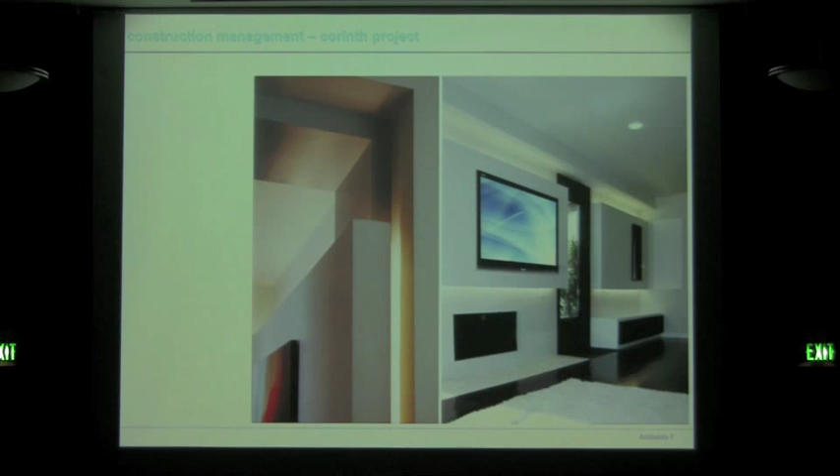Our design arm—this project started at UCLA under Heather Roberge. We designed the whole project ourselves, and we actually built it with a budget of $20,000. So we designed and built this whole space.

The second project is a research project that we did with Neil Denari, essentially research based on looking into different patterns in which cities are developing in the U.S. especially, and then we came out with a couple of ideas on how to hopefully proceed in the future. Obviously, they're pretty crazy.

The next project is a pre-manufactured home that we're developing for Malibu. The panels of the home are actually being made in downtown LA as we speak, and we are going to build the whole project in about 3 months. We developed and planned the module so it's basically shifted in plan, so you can have different views of a lake in front of this property.

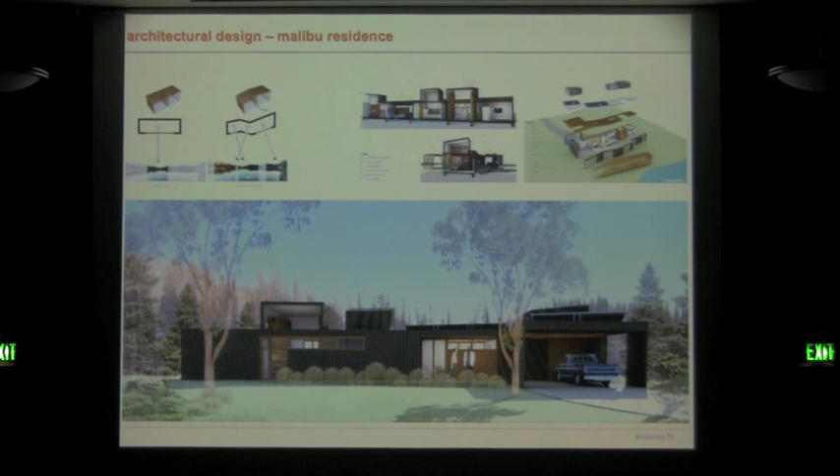Second house is a house for an artist. Essentially what we did is the artist lives in this metal box, and then we lifted the box to create interstitial space underneath it, and that became her studio. So she lives in the box and works underneath the box.

Next project is basically an addition to a community of different bungalows, and we were asked to add a second floor to them. The first floor essentially follows the grid on the left, and the added floor follows the grid on the right, and they converge on our site, creating a deformation in the new housing and the new housing types.

Next project is an office in Culver City. It's organized with a spine that goes through the middle of the space, and the different components are organized along that spine. As you can see on the right, you have the desk on the right hand side of the space.

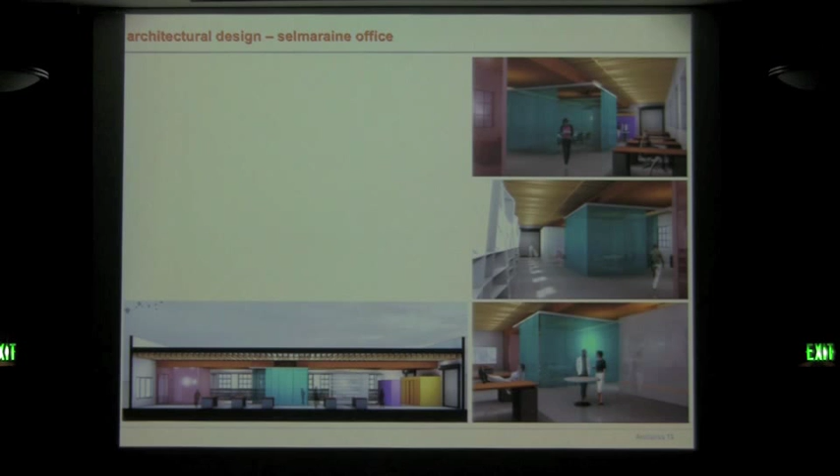This project is a proposal. We try to reconfigure the way housing typology works. Instead of having 4 different towers, we try to mix the programmatic elements across different towers so that you actually create different views and hopefully interactions between the people that live in these different towers. So as opposed to having 1 tower for 1 house, we commingle the spaces.

This property recently finished. We basically did the construction management and the design. We essentially redeveloped the entire facade.

We try to emphasize the geometric conditions that the house has on the bottom left-hand side. This project is under construction, and should hopefully be finished in 2 months.

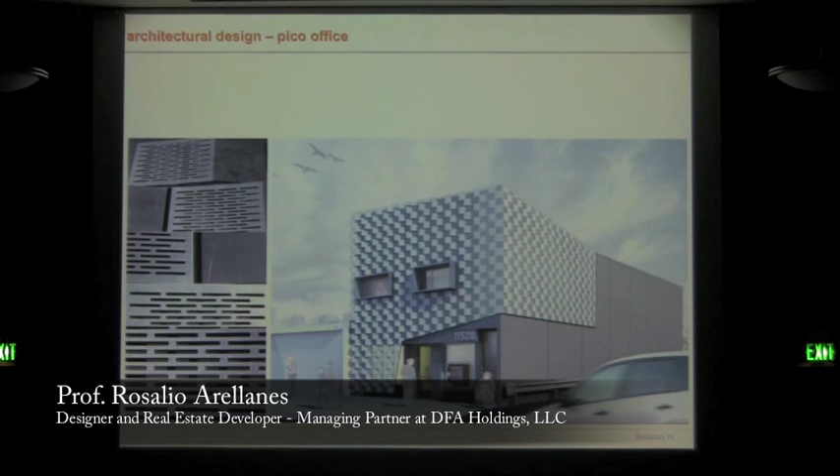As you move across the facade, the panel itself thickens due to the introduction of this fold in the panel. If you look at it from one side, it reads as solid because of the solid side of the panel. From the opposite side, it looks more open because of the openings in the panel. So it creates difference. This house was the first house that we actually developed, designed, and constructed ourselves.

We try to use material reality to introduce continuation of the different spaces inside the home, and we also try to use sectional conditions on the spaces so we can create flowing spaces inside the home.

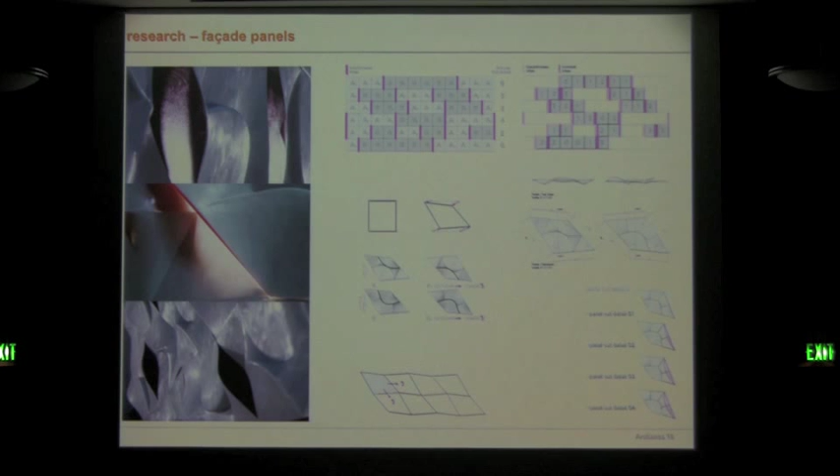This project is a research project where we developed a panel system that you can tessellate in different ways to create difference throughout a facade. We also introduced this opening technique here on the right, where you can cut that piece out on site to create fenestration as you move across the facade. So it's about creating difference in one panel.

This project is a research project where we started with plan formations and tried to develop and copy different ways of making connections in the real world, basically overlaying different types of materials.

And that's it. Thank you so much for your time.

Should I go ahead? All right, good. So my name is Carlo Aiello.

I teach a second year studio here, and there are four main things that I'm interested in. The first one is obviously teaching. But just an introduction first: I graduated from Columbia University, lived in New York for 10 years, and have been in LA since 2 years ago.

I'm interested in publishing, industrial design, and obviously architecture. I'm the editor-in-chief of a New York-based architecture and design magazine called Evolo, which was founded in 2009 with the intention of promoting innovative and vanguard architecture. This is the issue coming out now in November, called Architecture Neogenealogy.

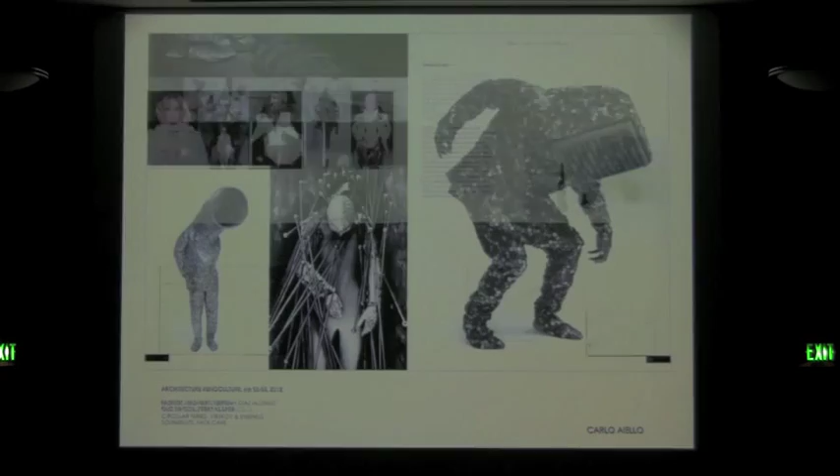Another project we're developing, publishing also in November, is a 2-volume book that's a compilation of 300 projects from a well-known competition we organize called the Evolo Skyscraper Competition. The idea behind this book is to have 6 different chapters combining the different ideas we received in the entries: technological advances, ecological urbanism, new frontiers, social solutions, morphotectonic aesthetics, and urban theories and strategies.

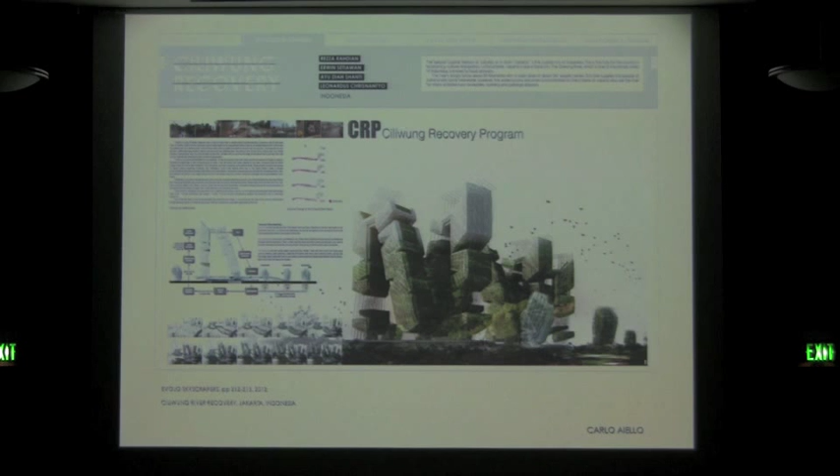For example, this project is about the revitalization of a river in Indonesia that uses different kinds of filtering systems to allow for filtering the pollution of the river, but at the same time providing open markets, etc.

Another project of interest in this book is about fragmentation and pixelation, in this case the studies of Stephen Wolfram on cellular automata and fractals, and how we can use that kind of tessellation in architecture. Everything we design, we do it all ourselves.

We have our graphic design team, which is us working at the office here in LA and in New York. This poster is also about the skyscraper competition, in which we have 620 projects in this little publication we just published a couple of weeks ago.

As I said at the beginning, this is the part that interests me about publishing creative work, mainly from young professionals and students. The second area I'm interested in is furniture design.

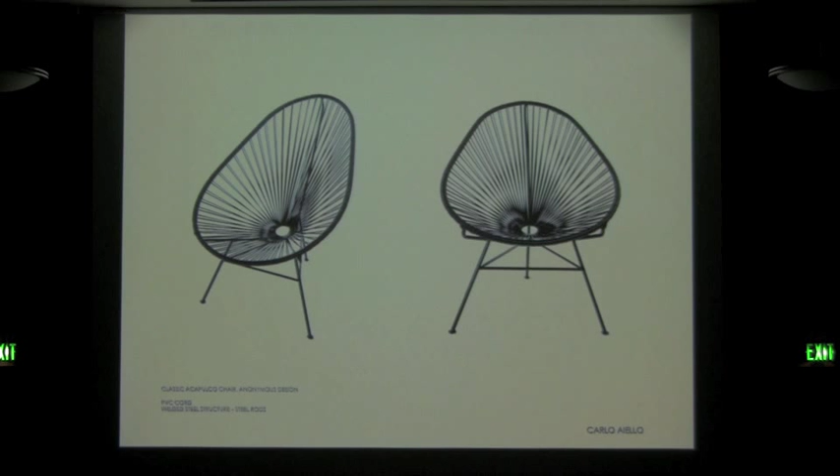In this case, this is the well-known Acapulco chair, an anonymous design from Mexico. We got a client who was looking to redesign this chair using the same materials.

So our idea was to create something we call the parabola chair, which uses steel rods and recycled PVC cord to create the structure. We want to create a continuous surface that serves as the backrest, the seating, and the overall structure for the frame.

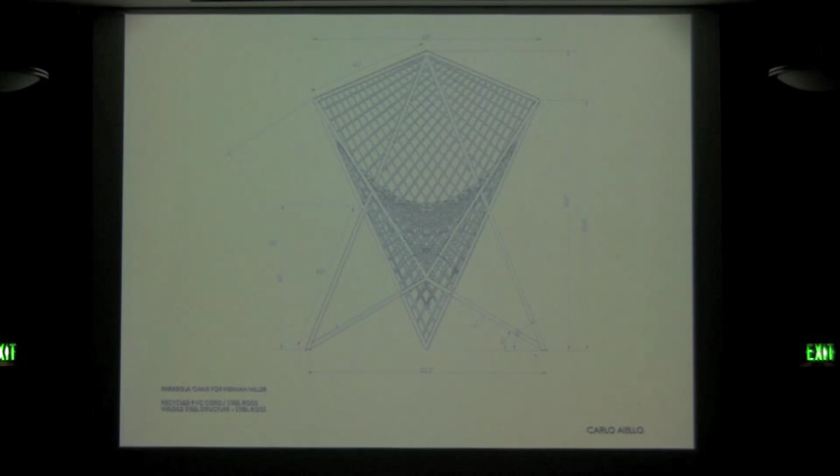Right now we are working on different prototypes for this, and hopefully it will be available in stores in 2013. Our main concern is how to create this continuous surface without it being a huge chair, depending on body size, and how to have the most comfort within a very constrained space.

We didn't want to create a huge piece of furniture that cannot be located anywhere. So we were thinking about different ways to create the weaving. One way would be to use the recycled PVC cord, other techniques would use steel rods of a smaller caliber, and there are some details on how everything would be attached or constructed.

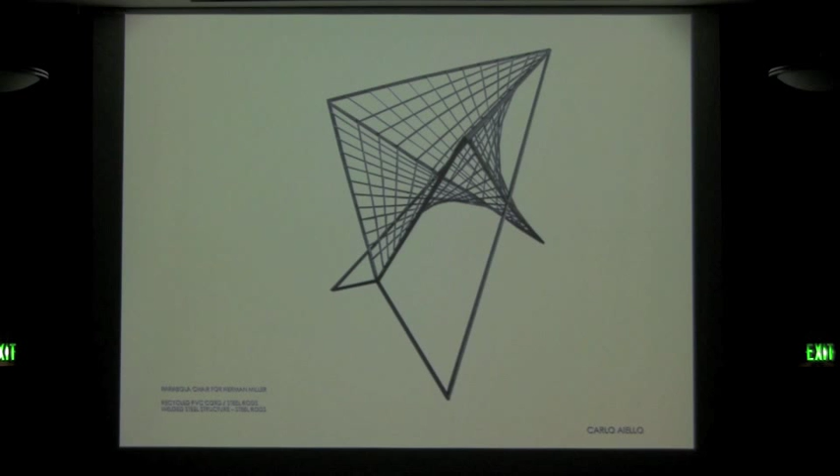The third project I'm presenting now has been in development. We'll just go ahead and advance. It's for an open market in Veracruz, Mexico.

The idea again is a self-supporting structure, similar to the chair. For this one, we are investigating traditional basket weaving and how we can create a self-supporting structure for a small open market.

The idea was to create three main domes that would allow for different programs inside, with different spatial qualities—from a super high space to smaller areas—and some backup program underneath, which isn't shown in this section.

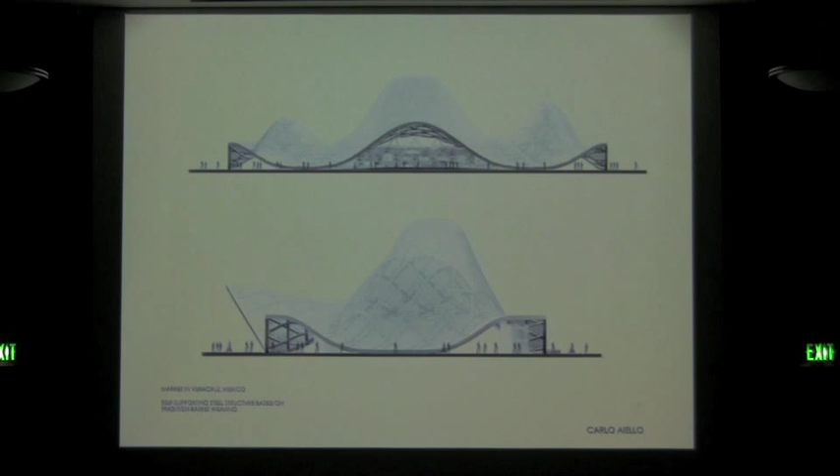So pretty much that's what I'm showing to you tonight. I'm interested in teaching architecture and industrial design. Thank you.

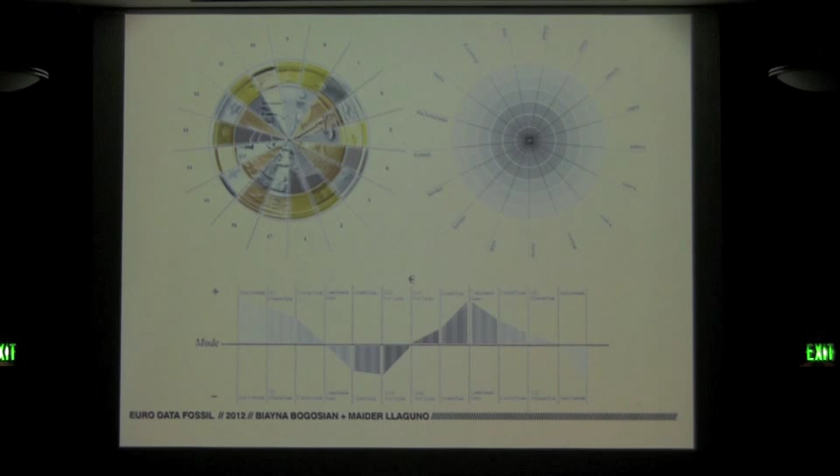Specificity of the territories and its users. It seeks a constantly added resolution of information that is contained within a project.

It allows us to question how to materialize the cache of a set of localized information, how to curate it in a sense that allows for the user's input and relates to further social constituencies. Buildings could start to operate within open source localized constructs where the users inform more sustainable, highly diversified, and technologically advanced buildings.

Objects designed for communication contain information that goes well beyond their immediate use and appearance. In some cases, objects like cell phones and computers exist to provide us access to complex systems and networks, behaving as gateways and interpreters.

Whether openly and actively, or in a subtle and subliminal way, these objects become a crucial part of our understanding of the physical environment. As communication prostheses, these devices are capable of accelerating or interrupting the rate of our daily behavioral patterns. As designers, our goal should be to help develop and improve these dialogues.

For instance, we can start to trace and analyze various users' range of movement and utilize the vector of difference each time in geometry construction. An example of that would be designing earthquake shelters in which the material behavior of the output responds to the initial rate of displacement.

Or we could allow multiple users to directly influence the geometry output. In this case, the designer needs to establish two types of variables: the first being the initial construction method, as well as the degree of influence of each user. This information is hard-coded and creates the framework of the project.

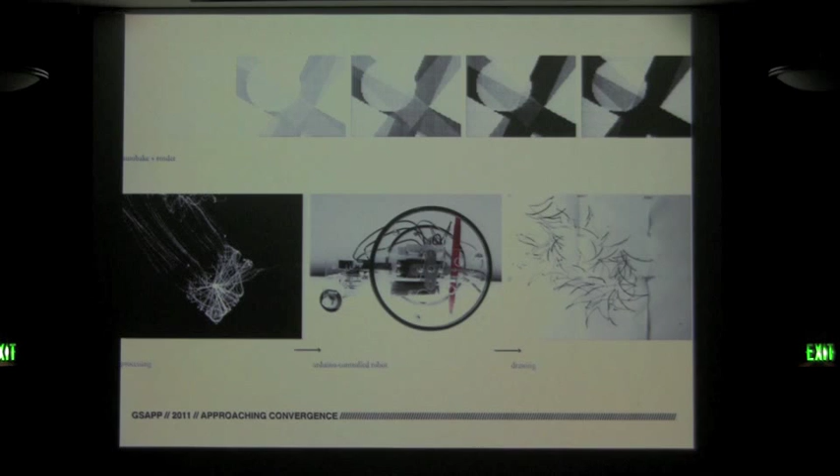The history of modernism is that of a progressive distortion of place, of the emancipation of architecture from the circumstances of its immediate physical surroundings, resulting in systematic production techniques. Based on this, our built environment dimensions were cataloged in charts based on efficiency and generic conditions of use. And a material such as wood was not differentiated based on its anatomy, but based on its standardized external dimensions, resulting in homogeneous construction typologies throughout the world.

However, now with information technology enabling us to map local and global environmental data, coupled with advancements in digital simulation techniques and robotic fabrication technologies, we can revolutionize customization of our environment. The potential of shared resources, software, information, and techniques, when materialized, is to transcend the scale of individual and independent product modules to a larger scale of manufacturing and distribution processes. In this design methodology, where the design and typologies are each time subjected to different user and environmental inputs, new possibilities for a more interactive relationship with our product and environment emerge.

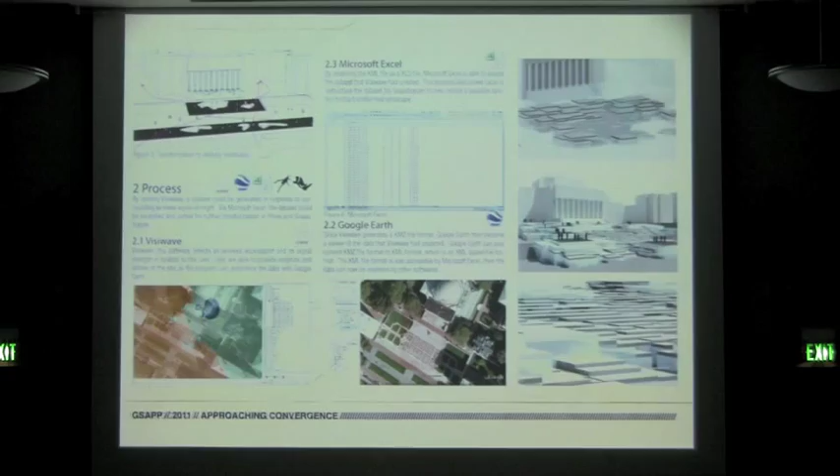Incorporation of geomapping and social network technology in everyday modes of communication allows collection of data not only from the place itself, but also from the interaction with the user. Applications designed based on information sharing, user collaboration, and interoperability that heighten the significance of users' input in an open source, communal, participatory system enhance interactivity with the physical place. In this regard, social networks such as Facebook and Twitter, set up based on a logic of data filtering and sharing, redefine today's social, political, and economic place of connectivity, posing the question of how to frame an architecture practice that facilitates participatory information sharing and collaboration where user and environmental inputs can be integrated.

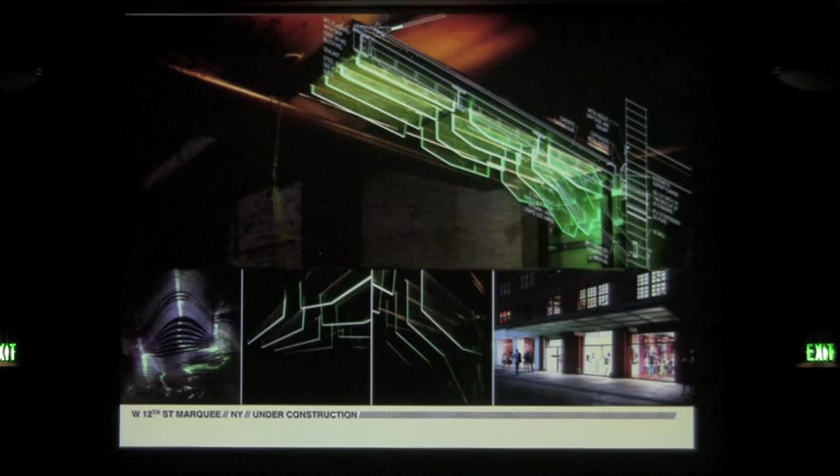If architecture's goal is to reference its environment and to be referenced by its environment, then as designers of these scenarios, we have to develop and improve this dialogue. The architect, as mediator between material and immaterial, human and technology, has always operated across a multitude of domains at once, with an array of strategies at hand. The digital age has only accelerated this multiplicity. Each novel tool introduced to the architect's toolbar has struck a new vector of architectural narration, and with it opened further possibilities of conveyance of concept and method.

The goal is to approach a convergence of varied user inputs possible with communication devices, with computational platforms of design, with a specific focus on integrating techniques of digital and human craft and analysis into a near seamless and active coexistence.

Thank you very much.

Okay, so just by way of introduction, my name is Laurel Broughton. I'm currently teaching second year, and this is Brendan Muha, who is also currently teaching second year. This is the beginning of a project we're working on. It's inspired by some issues we've come across in our work teaching second year. It's part of an ongoing conversation between the two of us about the everyday life of architecture relative to the discipline of architecture. Second year is an important point in the architecture program that sits between the foundation year and the more pragmatic elements of the comprehensive building project.

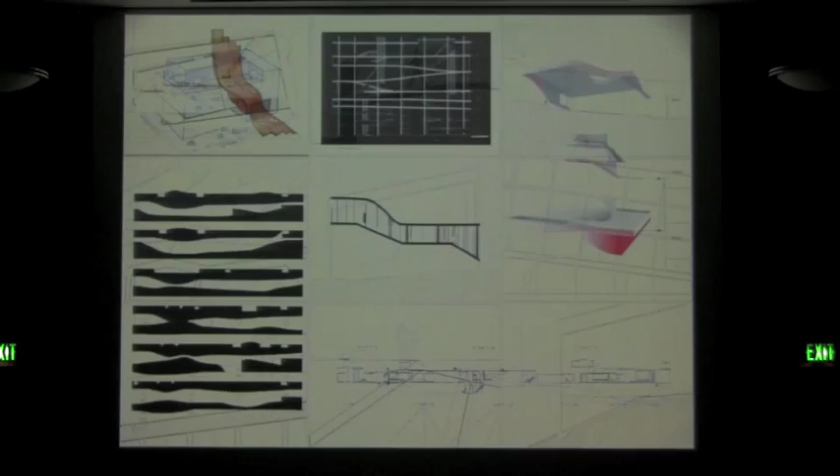It's also an ideal time to investigate larger disciplinary issues in architecture. So what we just saw were some student images of sloped floors. We noticed this feature again and again, and we realized we're all tapping into a kind of latent architectural desire that recurs throughout the discipline: smoothness, continuity, connectivity, flow.

And so what happens is this desire always works its way into steps. It's discontinuous, choppy, and clumsy — discrete bits of material, not continuity. But they're doing the best they can with what they have, in that we have a reality that doesn't actually work with slopes very well, and they become mostly visual.

And they become vacant and uninhabitable, which is exactly what we have here. The idea, the image of connectivity — a lot of wasted material, but not actually real physical connectivity of people relative to one another. So you're damned if you do and damned if you don't. But architectural history is full of examples where we've failed to occupy the spaces we can envision. Here are two familiar examples that never got off the page: Superstudio and Banham and Dallegret.

But here we have Mies and the Smithsons. They understood that new types of space required new tools for living, and they committed to making them. So you can see how the lightness and the volume of Mies's furniture and dividers allowed for the uninterrupted flow of the plane of his open plans.

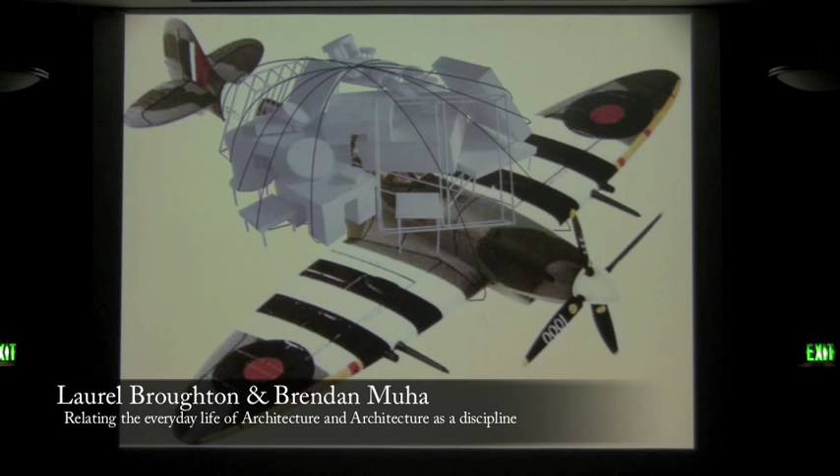And now the fairy tale. So they set off for a new land, bringing with them all their possessions and furniture, some old tables and 20 cents in their pockets. After a long journey, they came across a habitable place, and 2 by 2, they began to unload onto this broad new plain. Off of the old plane and onto the new plane.

They ventured forth, but something wasn't quite right. There were problems. This broad new plane was at a 10% slope. Nothing worked as planned. Some things just rolled away. Even the children were upset.

They had no place to sit or read or play. Life was all work. And even Andrea Branzi was upset and couldn't figure out what to do. He tried to sit down and think about it, and then all of a sudden he lost his balance, and he and the stool tumbled down the slope.

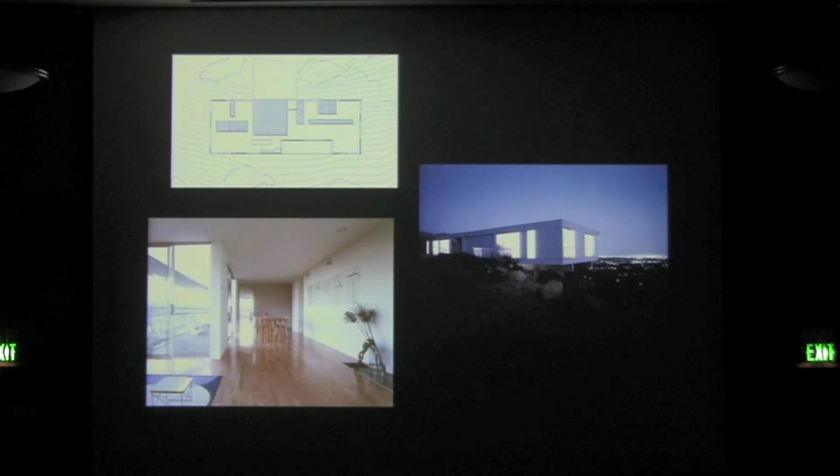On the front side, you have what you see on the bottom left, a 184-foot-long view through the house, through the living, dining, kitchen, family room, and the smaller rooms are facing the hill.

There's a second house that I want to show, the Sola House, Mount Washington. 3 volumes stacked on top of each other, all of a different size. They sit sort of lightly on these concrete walls that we excavated into the hill. It was a very difficult uphill site.

So the foundation walls are both the border between man-made and nature, as well as the foundation. The plan, bottom left, entry. Middle is the middle level bedrooms, and you see on the top right, this canyon going through the middle level, and the library down here.

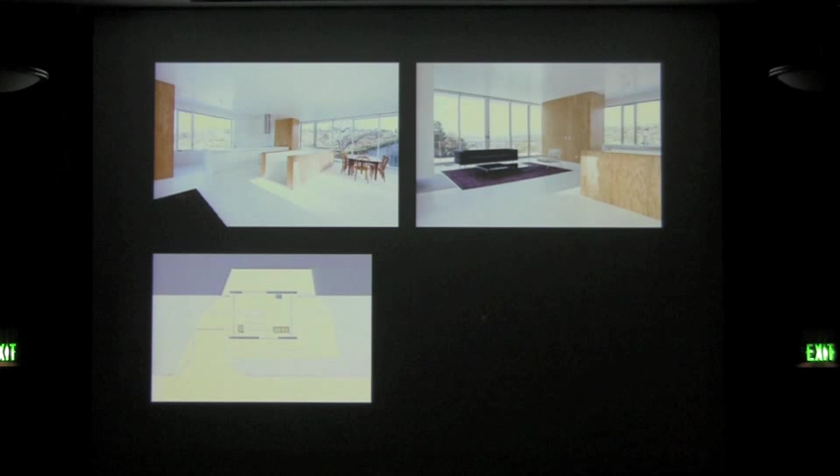The whole idea of these elements are these sort of tubes, white walls, floors, ceilings, and these elements that are sheathed in plywood that contain bathrooms or storage and so on. So this is at the top level, the living space, open on one side to a park, the other side opening to the city.

Some of the art-related projects that we did: this is a project we did with Olafur Eliasson. He's probably best known for the weather project he did at the Tate, top left. And so the house that I showed you at the beginning, the Jamie house, this is what he proposed to do to it. A 120-foot diameter sun attached to the side of it.

Now, we start working with the structural engineer on that. The city freaked out, pulled the plug. That was the end of that. He then introverted the project, did it all on the inside.

Sharon Lockhart, an artist we've been working with for about 13 years, project in Vienna at the top left, project bottom right, something that was at LACMA this summer. It's opening in Vienna shortly.

Mike Kelley, an artist we did 3 projects with, including the Münster Petting Zoo. This is 2007 in Münster. Every 7 or 10 years, it's an international sculpture exhibition. So we worked on space planning with him on this.

This is a project we did with Stephen Prina at the Secession in Vienna. Basically, we rebuilt about 20 or 30 pieces of furniture from 2 Schindler houses that no longer exist. Then he painted them in this pink, and they were installed in the Secession, and this had to do with a story he tells about an experience in the 80s seeing these Schindler buildings and Schindler furniture.

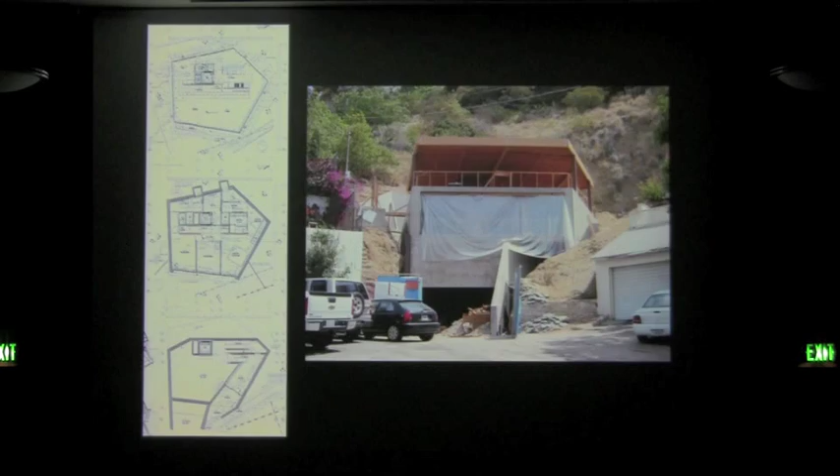Because of this geometry of the site, the only thing that worked there was a 5-cornered house that addresses the topography, setbacks, and so on. Once you get to the top, you have a living room that is enclosed in glass on 5 sides. The roof is supported on 5 steel columns. From this living room, you have access to a level area that you don't have otherwise.

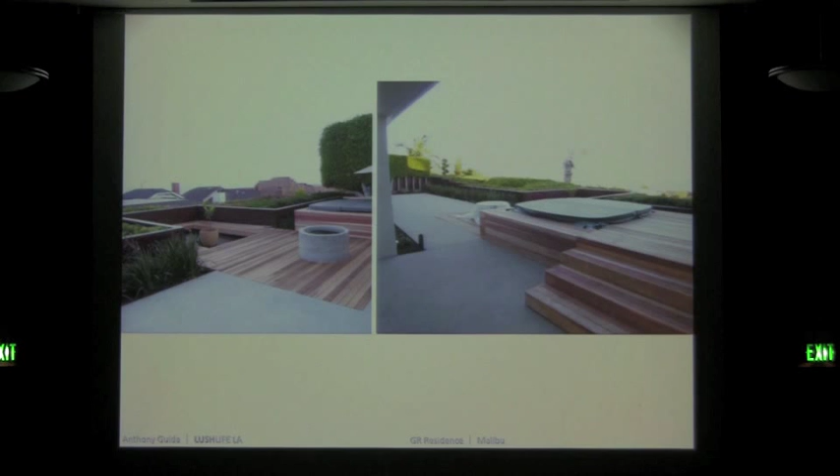Here we did new concrete, raised the backyard about 12 inches to give a better view or overlook. We took an existing deck and made a conversation pit, fire pit, raised spa deck that conceals an inexpensive fiberglass tub. This is a fast-track project for a long-term client. We came in this summer, and the goal was to do in about 8 weeks a redo of their master suite and this really awkward area on the left, a kind of den and office area that had very low ceilings, which we'll get into in a minute.

We fast-tracked this from design drawings to engineering to permits to somebody doing demo in a week and a half. This is the master suite on the right. We updated and got rid of 1980s luxury like the bidet and the fireplace in the bedroom.

On the left, two bedrooms with a new bathroom in between. The trick here was raising the roof, or the ceiling, which was at 6'9", to a standard 8 feet, and getting it all back together per current seismic code without disturbing the exterior, which was renovated just a few years ago.

So you can see the kind of open roof. These are photos finishing up the job, the master suite and master bath on the left, the custom casework in the office den on the right, and that awkward phase where the owners are in but the contractor is not out yet. So we do a lot of that.

So this is the next project, unusual for us because it's not a house. This is the old red car charging station that's on Sunset and Silver Lake. This is currently the offices of independent record label Epitaph.

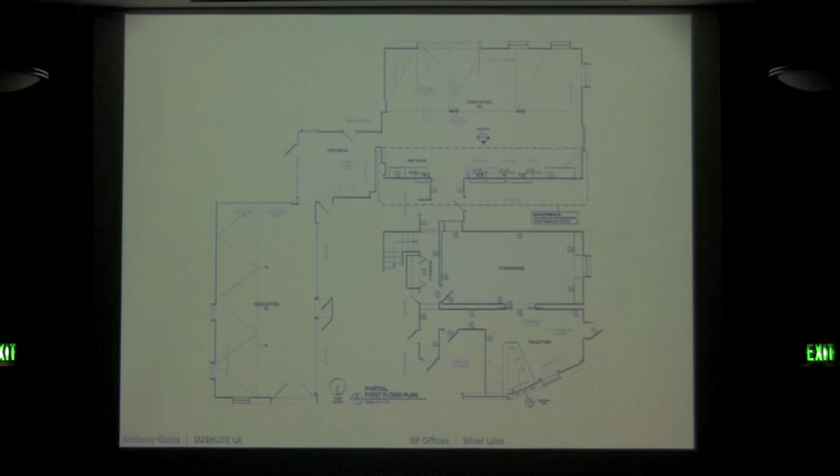We're doing a kind of quick redo for them, a lot of casework, getting a consistent look throughout the offices, new furniture, redo of their conference room, redo of all their public areas, lounges, the entry. So this is some casework in the office area.

Some reception desk, which was a challenge given the contractor. We'll see this in a bit.

This was exciting for us because many of our projects are collaborations with the owner, but in this particular case, the record label has an art department, which is really fun to work with. There's a kind of history to the company. It's very punk rock.

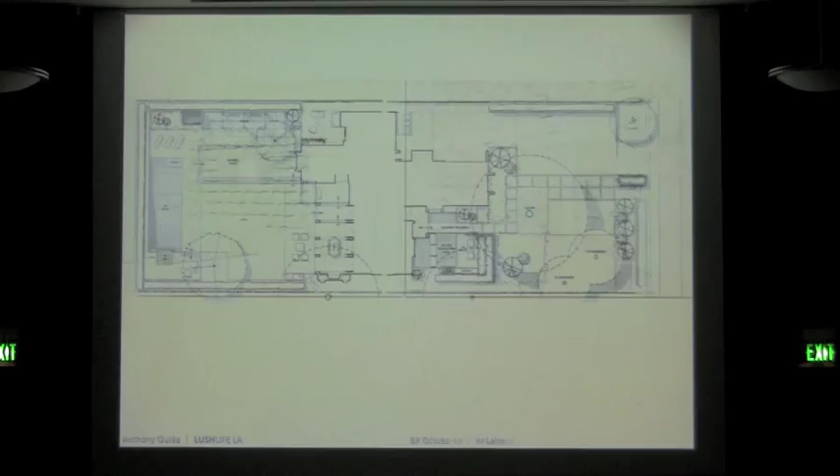Some of the new casework is in. This is an exciting project that we're working on right now. This is an early 1980s Buff and Hensman house in Pasadena that's undergone a full renovation.

Tom Marble, who's an architect, is doing the renovation. We're working with him on the landscape. It was a spec house that never really had a designed landscape, so the challenge was to design something that fit the house, fit the renovation, and maybe the sensibility of a Buff and Hensman residence. This is the entry court, which is a bridge over a reflecting pond, and a water feature.

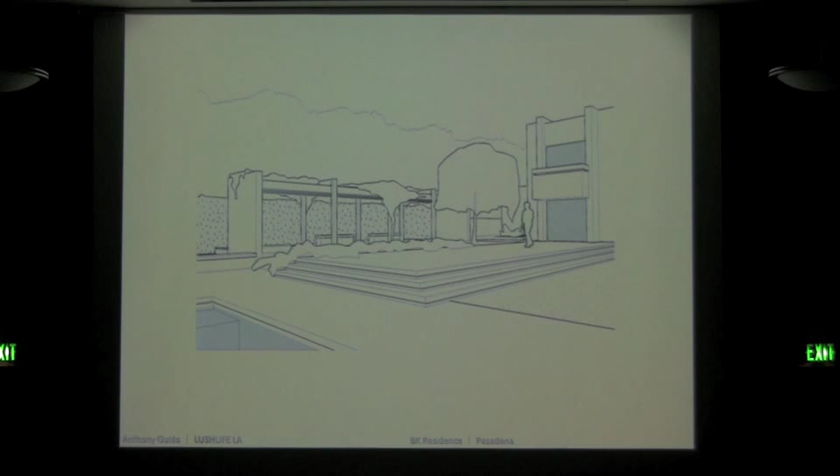And then in the backyard, we're taking cues from a lot of Buff and Hensman projects we've looked at, where we have a kind of paved land bridge that spans the yard. There's a pool in the foreground. There's a pergola structure that's new, that we designed. And this is hopefully getting built soon.

Maybe it'll be built, maybe not. But that's just a kind of window into what we're working on at the moment. Thank you.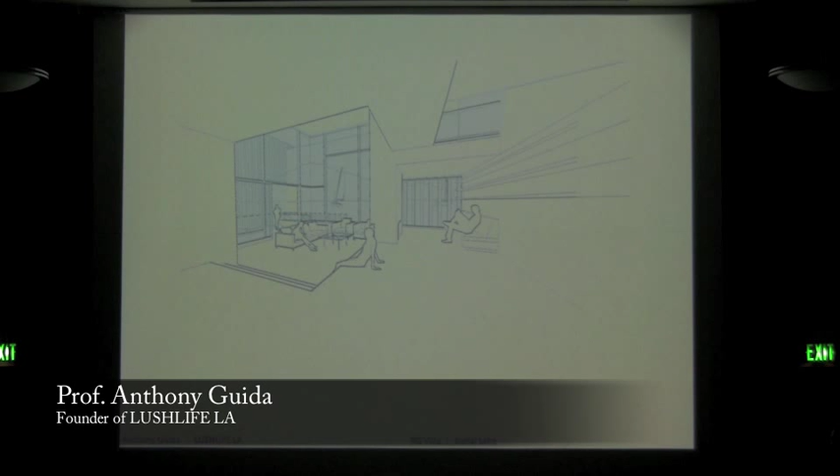We're going to go right through. So my name is Eric Haas. A lot of you probably know me. I coordinate currently the second-year graduate comprehensive studios. I'm going to show you a few projects that have been recently and currently and future in the office based on our kind of educational institutional work that we've been able to do recently.

First project is a preschool for St. James Episcopal Church. This is in Koreatown, an infill site. The clients came to us with the existing parking lot and said we need a building.

This is in January, we needed a building for the opening of school, so we designed a modular building, working with a company that has worked with several other well-known architects. This is a quick design, very low budget project, a preschool for 60 children, about 4,500 square feet, working with a kind of standardized modular system with some custom site work.

It's an infill of the large apartment building on one side of the lot and a mini mall on the other side. This was sort of our first modular building, actually a very interesting experience. This is the building already built in the warehouse out in Fontana, waiting for the site work to be done.

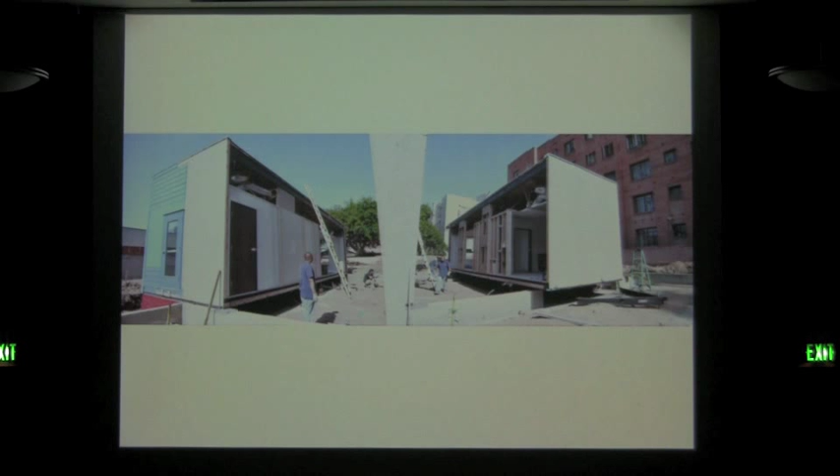Everything here working as a kind of commercial coach was interesting to us in terms of the permitting and the way the whole system was working. So we were waiting for the things to come together. This is the finished building from the front.

We're still doing little bits and pieces here. The project had to open and go through a licensing program, so a lot of very quick decisions were made, some of them not involving us as the architects. So we're going to work on fixing some things.

This is the finished building's interior. There's a nice relationship between the interior space and the exterior you see on the left, and then the kind of hero moments in the side yard, with sunshades in colors that had to be immediately available, so not our first choices.

The second project is one we're doing for Para Los Niños, a development downtown. They do community outreach and education services. Michael Maltzan's building at the Inner-City Arts is at the bottom of the slide.

We're on a tougher street than his project, basically a block off Skid Row. This is what the project used to look like. It's for the teen center, and I defy anybody to think of a color that is not in this image right here. The new project is a change of use to a community wellness center.

They're doing mental health outreach programs for the homeless, including a special dedication to working with families and homeless families. So it's basically an existing brick shell. We're doing a new entry and a whole new interior for them.

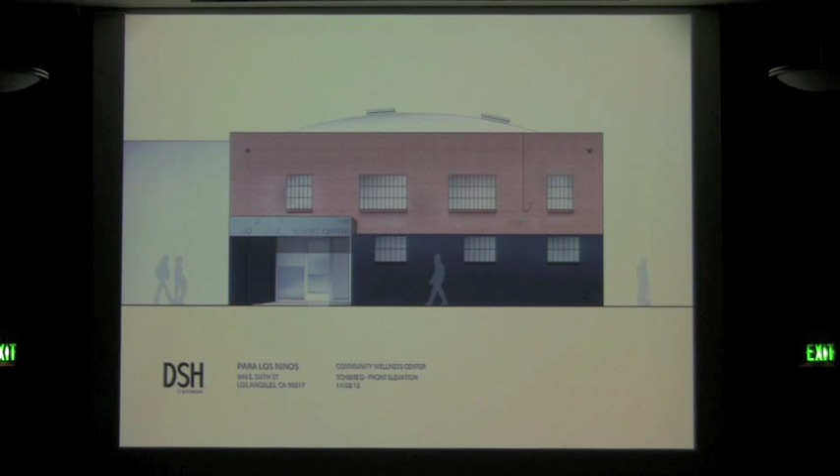So it's a very gritty location. Security is a giant issue, but we're trying to get an interior situation that, once you're past a multi-layered entry sequence, produces a very soothing environment. There are play spaces within this for the kids while their parents are talking to therapists and so forth.

This project is in bidding right now. Then the last project, which we're just beginning, is for Larchmont Charter High School. This is Lafayette Park. The circle is a 1955 to '57 Welton Becket office building that we're doing a change of occupancy and alterations for, to turn it into a high school, leveraging the public facilities across the street in the park, library, and Stephen Cantor's center.

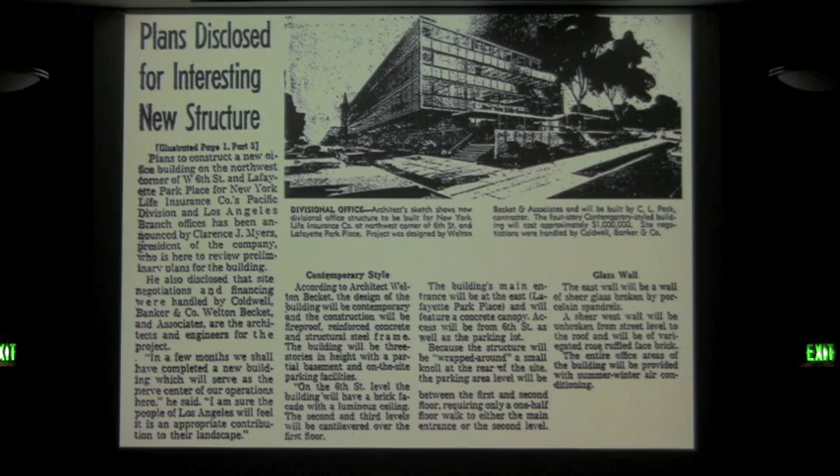This is an original article on Welton Becket's building, from back when the LA Times published articles on interesting new structures. Thanks to Trudy for helping me find this one. So we're kind of caretakers for the building as it comes up.

Right now it's a kind of adult school occupying the building. That's the CNA building, by the way, next to it, now the Superior Court—my favorite building in Los Angeles, for those of you who care.

So this is an interesting building. I mean, it's really nice—each elevation is a different facade. It's all the things that we talk about in sustainability that Welton Becket was doing back 50, 60 years ago. South elevation, louver systems, some ficus trees, which if I have my way will be long gone.

And we'll get into the plans a little bit. It's a high school for grades 9 through 12, about 500 students. This is the plan of a really quirky building, small footprint, 2 exit stairs.

Our big design move was to move the corridor to the bottom of the building across the south facade to serve as a gallery and a kind of social space, thinking that a lot of the activities that happen in a school are outside of the classroom per se. This is the kind of core of the building, which serves as the ventilating heart of the existing building.

And we're going to take advantage of it. We've been talking to the engineers at Arup and trying to convert some of the antiquated building systems into something that's going to work for us in terms of the new life of the building.

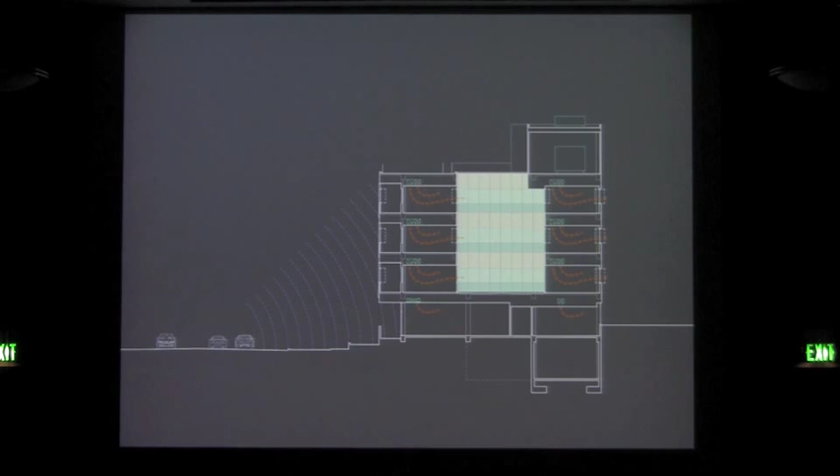The section indicates that we're using this gallery space on the left-hand side as a buffer from the acoustic noise of 6th Street, turning an ancient dual-duct HVAC system into one where one duct will be serving as assisted ventilation for the passive ventilation in the building and air conditioning.

And just an image from the rooftop, suggesting the possibilities for the school. We're really excited to begin the project, a sweep from downtown on the left all the way back around through 6th Street, so it provides a heart, and we're hoping that next year's PechaKucha will show the school as an interesting finished project. So thanks.

Hi everyone, my name is Alvin Huang. I teach in the post-professional masters here, as well as 5th year topic or thesis studios. Just started at USC this past year, or this is my 2nd year now that I'm here, although I did do my undergraduate here. So I first entered USC in 1993.

And at the time, there was a distinction of people that were identifying certain offices as what they called CAD offices. So there was an era where I thought maybe I should learn the computer. And with that, I jumped into it head first and started recently an office called Synthesis Design and Architecture. We're a small practice. We believe in what we call applied research and experimental practice. These are a few tenets that kind of describe the work that we're interested in.

We're going to show a few projects today that kind of ascend in scale. The first is a very small interior installation, which we did in London. Which you see above is the kind of generative diagrams, pixelized version of the structural system, and all of the sheets laid out onto plywood panels.

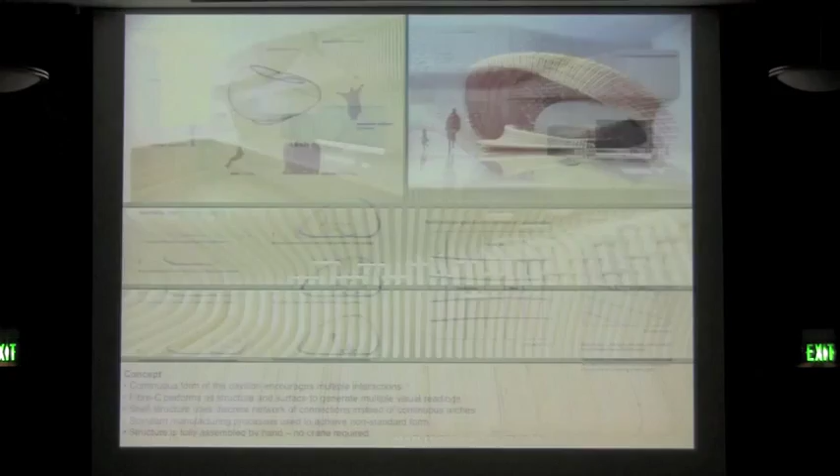This is a pavilion which we did in 2008. It was widely published and has won numerous awards. It's a result of a competition sponsored by Fibre-C, which is a manufacturer of fiber reinforced concrete.

What you see here is the documents which we won the competition with. We went through a series of extensive research and material exploration where we did multiple structural analyses, which helped us design this kind of parametric sizing of the members, and developed a construction document set.

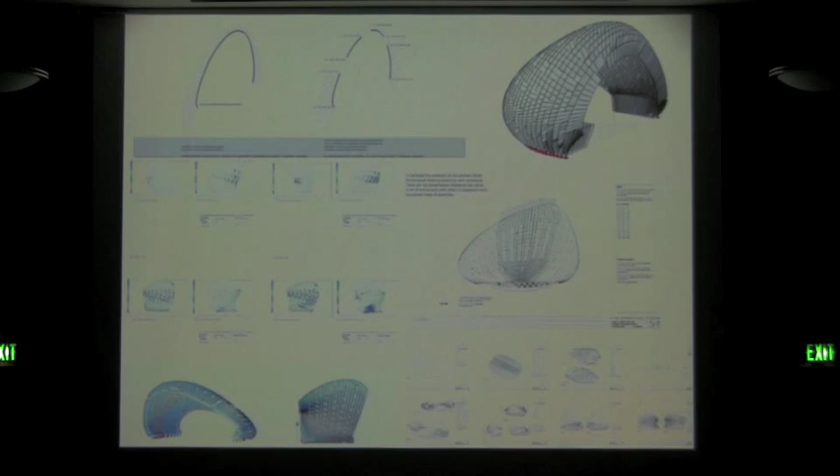Which you see here, which is more like an IKEA flat pack assembly process than a traditional drawing set. See the construction assembly on the top left there, which was entirely a digital fabrication process going from file to factory, and some completed images of the pavilion here.

The pavilion was intended to be on site for 3 months. It was so popular that they extended it for just under 1 year. It has since been sold at auction by Phillips de Pury to an art collector in Singapore, who I have no clue if he was ever able to put it back together. Since there are no photographs, I assume he has not.

This is an installation we did this summer with some students who may or may not be in here.

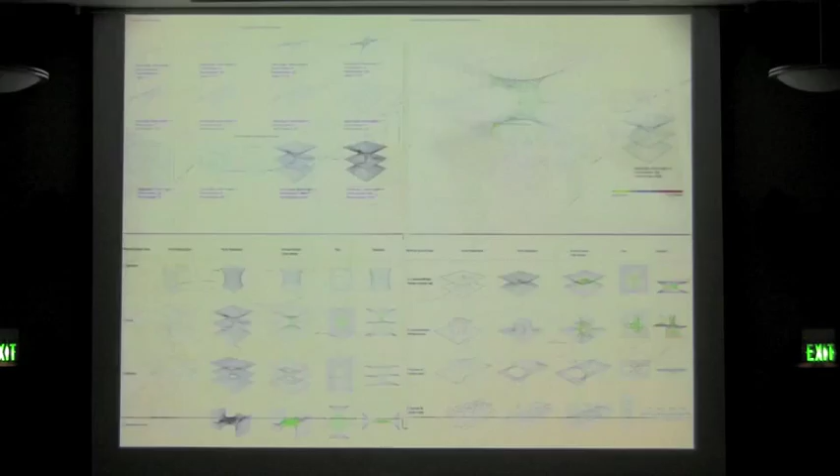Another student, Banaz, was interning for me over the summer, and she did these diagrams using Kangaroo to simulate mesh relaxation processes, trying to use force to find form, defining what is known as funicular form.

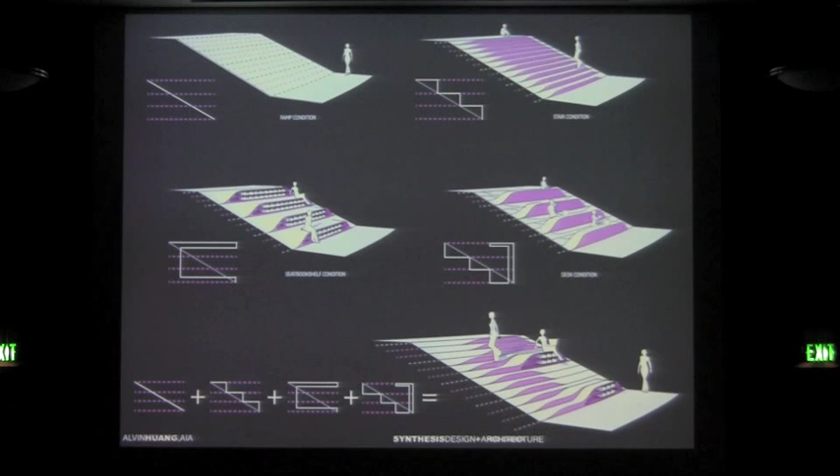Instead of thinking of the furnishings as something added to the architecture, it's something that comes out of the architecture. So between stairs, shelving, desks, and seating, all of the elements are actually integrated into the sectional changes within the geometry.

So you move through the building, through this ascending series of interconnected spaces. Bookshelves peel out of the ground, stairs peel out of the ground, desks peel out of the ground, etc. Then you arrive at the top into this roofscape, which is a kind of recreation of the same patterning you see in the ground plane.

Another competition we did this summer is for the Keelung Harbor Terminal building, inspired entirely by the notion of carbon fiber. The name Keelung actually means hen cage, so we looked at the weaving patterns of these hen cages and thought of them as a sort of exoskeleton, and the notion of carbon fiber as a micro exoskeleton.

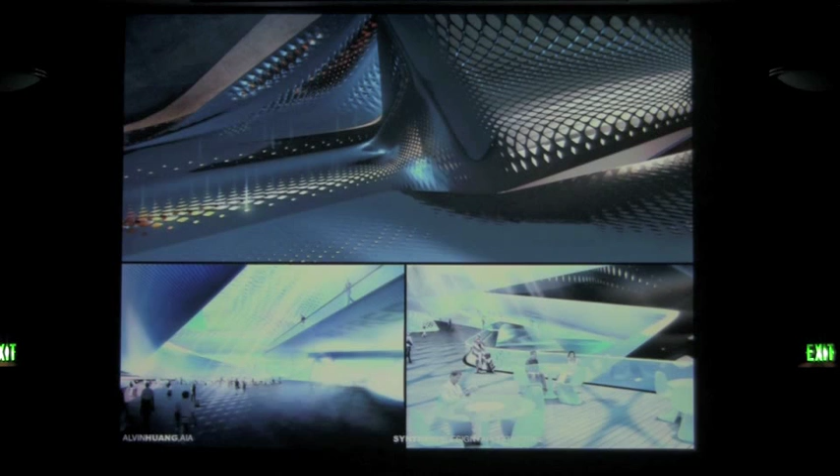So the project is really about gradients, the gradient that goes from exoskin to exoskeleton. That gradient expresses itself as a structural property, as you see in the bottom left, as an environmental property, and as a spatial property. What you see here is more about the skin being expressed by this gradient exoskeleton, and the fenestration internally being expressed by that, as well as the gradient spaces that arrive out of this.

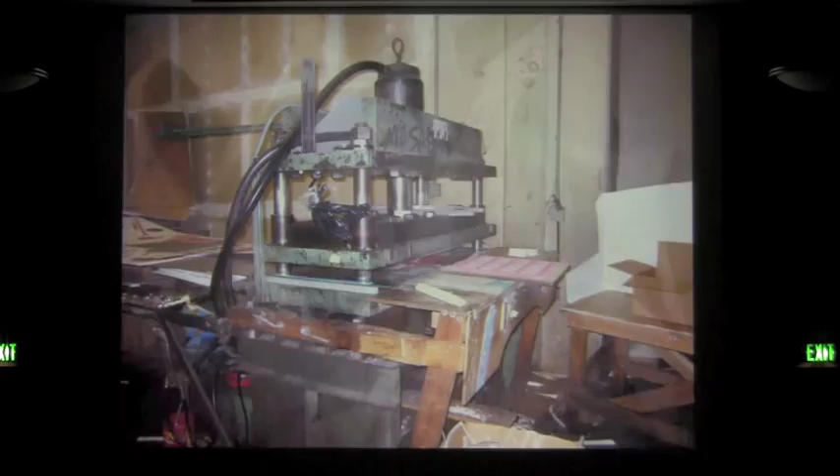Tonight I'm going to talk about machines, parts, layers, and show some images from installations realized from these elements. All of the work I'm showing has been done by the firm I co-founded with Emily White. Our firm is called Layer. So I'd like to start with this image.

It's because it's just a mess. This is an image of a die cutting machine. I would say we are equally interested in both high-tech and low-tech machines. This is an example of a low-tech machine, a die cutter — essentially like a giant cookie cutter, and we used it to produce this installation called Fat Fringe, which was originally at a gallery called The Fix.

The components of the canopy are all made from the die-cut paper from that machine. And we had an interest in fringe as both an element within the overall form, rather than just as a kind of detail within the individual part.

This installation was selected to be in the 2010 California Design Biennial. So we actually, without having planned it ahead of time, moved this entire installation, 700 parts, into storage, and then reinstalled the canopy at the museum.

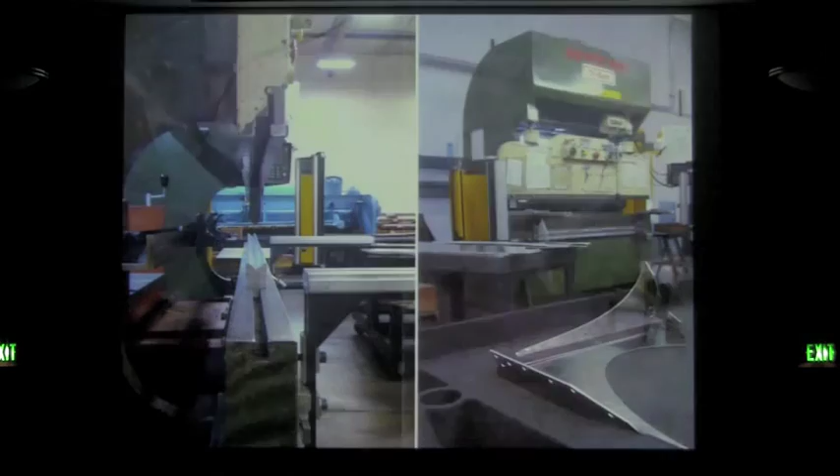More machines. These are some images from another industrial process we've been using, which is basically an industrial brake. For the next two projects I'm going to show you, we use CNC laser cutting, the brake, and then powder coating. This is just an image of powder coating, showing the combination of old school and new school CNC powder coating.

The two projects I'm going to show are Three-Horned Beast and Loose Horizon. They both use the combination of laser cutting, industrial brake folding, and powder coating. So this is some more parts.

These are the parts from Three-Horned Beast, which is a pavilion that was built in situ at the New Children's Museum in San Diego. There are over 400 unique pieces in 7 powder-coated colors. This is just a set of them.

It was a very, very iterative process. We worked between physical models and Rhino models back and forth, so that the process was highly computational and also intuitive, and that was by design. That's what we wanted to do.

So here are some images of the beast. The program is an improv pavilion for children. We wanted to pare down the essence of improv to its essential elements, which is basically actors and spectators. The museum interior is a very open 3-story space, and we were interested in using the porosity of the design to allow for framed views from lots of different places inside the museum.

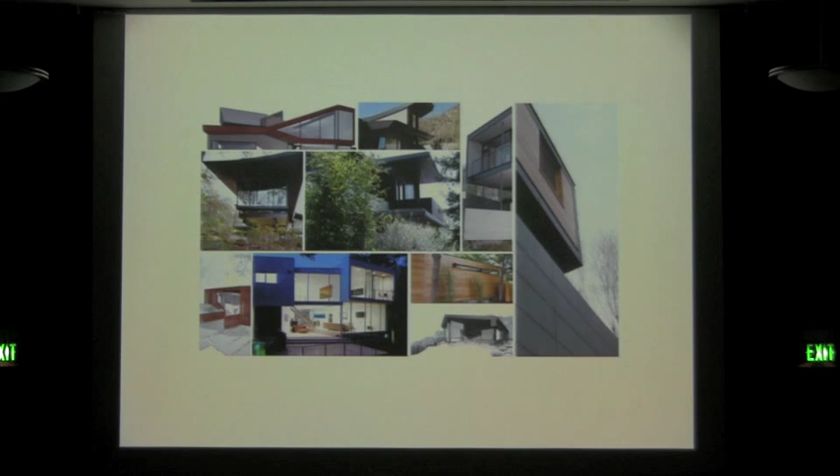To be honest, I don't have a problem with aliens per se, as they are a scientific evolution of monsters. However, aliens are from another world and lack a connection to humans, while monsters typically relate to humanity in some fashion.

Either through a failed experiment, an evolutionary mutation, or a biological disaster, monsters tend to exhibit exaggerated features. These mutations typically are expressed in a hyper-utilitarianism aimed at the creature's survival, yet contributing to its continued exile. Additional physical mutations may affect the creature's skin, fur, or clothing, incorporated to reveal, and in some instances conceal, the monster's emotions. External appearances typically expand the depth of understanding of the backstory and narrative trajectory.

Monsters may exhibit an integral and systemic relationship with their physical environments. In some situations, the creature deploys cloaking and camouflage strategies to minimize its visual presence. Conversely, the environment may be altered in the creature's likeness.

Attack of the killer mushroom. This is a proposal for KCRW's Sonic Trace mobile recording booth. We were interested in creating an object both familiar and foreign, one with ambiguous associative potential. The system consists of die-cut felt people icon patterns representing LA's diverse population. The felt patterns are arrayed to create a cylindrical space on the interior, accommodating 2 to 3 occupants.

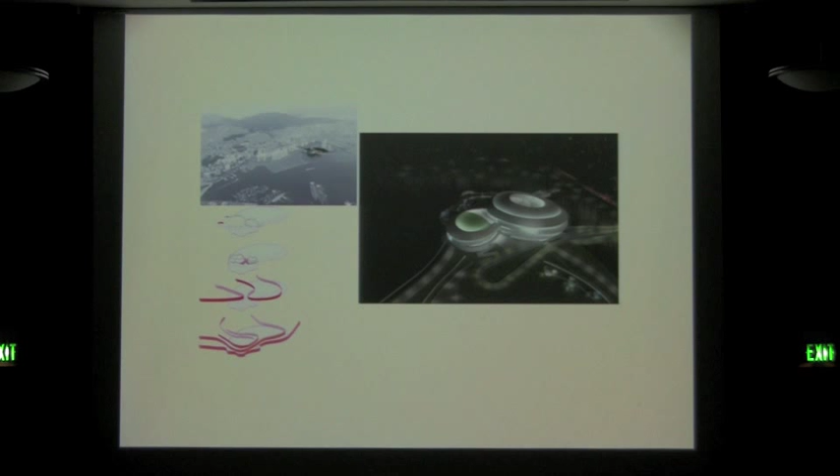This is our proposal for an opera house and park in South Korea. It's located in Busan, South Korea's largest port, and the project site consists of reclaimed land from the sea. Straddling the line between land and water, our proposal looks to mediate the port functions with the developing recreational activities. Due to that interest, we looked at shaping the entire landform to divert and accommodate pedestrian and vehicular traffic around the proposed opera. The creation of these terrains references the adjacent geography, acknowledges the reclaimed nature of the island, and reinforces the free and open access to the coastal edge.

The Opera House, multi-purpose theater, and accessory programs are housed in 2 converging volumes. Each volume is wrapped in a deep skin of layered bands containing circulation, mechanical, and support spaces, as well as exterior terraces.

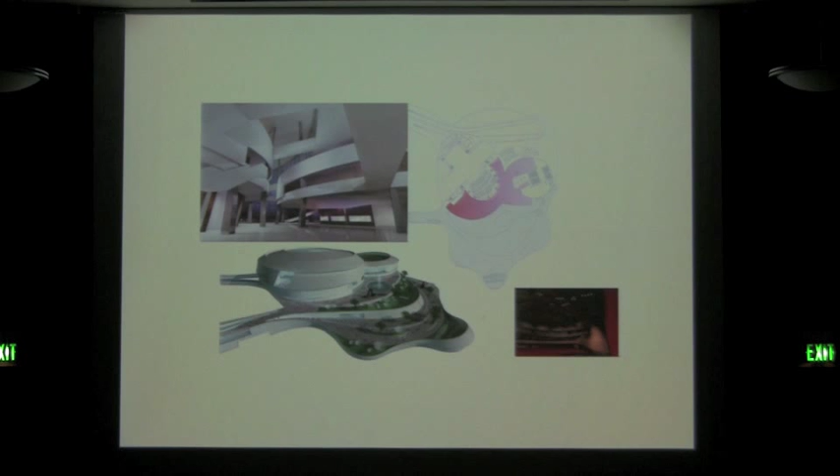These bands are stitched together at the points where the volumes intersect. The lobby, the byproduct of the converging volumes, contains the public programs and extends to the various recreational, commercial, and entertainment landscapes forming the island. These landscapes bridge to the mainland, creating a continuous loop with the developing entertainment activities.

This last project is a residential work that we've been working on for some time. The original property consisted of a 1950s post and beam house, not shown, on a peninsular-shaped lot with the street wrapping around it. Due to the site conditions, the only practical location was between the house and the street.

The husband said, 'Cut it down,' the existing tree. The wife said, 'It stays or I go.' So you see, we built that house around the tree.

Crosshairs of steel I-beams intersect at the moment where the tree penetrates the roof. Capturing the tree conflates interior and exterior.

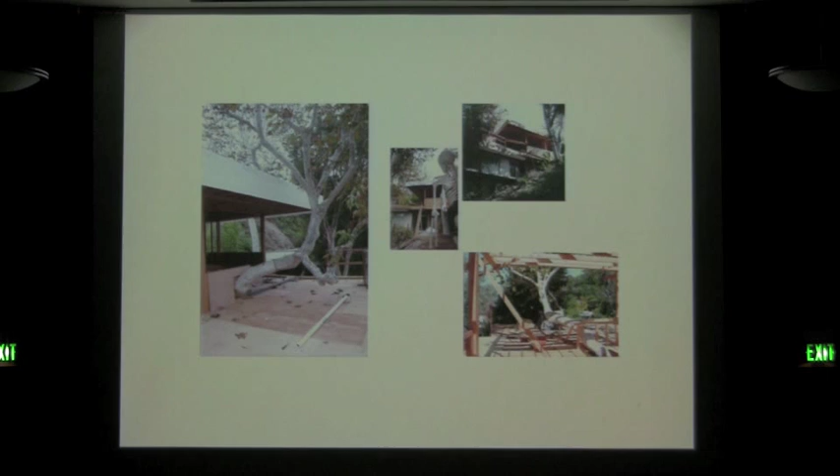The waterproofing for that wasn't difficult enough, so the owners asked us to build a second story on it. So you can see here where the tree exits the second floor, passes through the exterior wall and onto the roof deck. And then in the middle is the contractor, who is a real monster. Thank you.

My name is Eric Nulman, and this talk is not about vampires or werewolves, but about the immaterial spectacle that occurs at the twilight hour. I've identified three contributing factors that produce this effect: ephemerality, light filtering agents, and color-saturated spaces.

While nearly all architecture is physically static and built to last years, decades, or even centuries, its appearance and perception is dynamic, shifting within minutes, hours, or days due to changes in light levels from climatic and atmospheric conditions. This effect is most prevalent at twilight, when the color and quality of light go through rapid and dramatic changes that eventually disappear.

The visual effects seen in the sky around sunrise and sunset are produced by interactions between the Earth's atmosphere, including airborne gases and dust particles, and sunlight, producing a full spectrum of colors, each with a different wavelength. When the sun is below the horizon, the sunlight has more atmosphere to travel through, and the longer wavelengths become visible in the sky.

While the source of the light typically captures our gaze and focus of attention, the twilight effect's ambient luminosity reveals a visible atmosphere that's expansive and enveloping with color. I've been exploring different ways to manufacture this effect through artificial light filtering members.

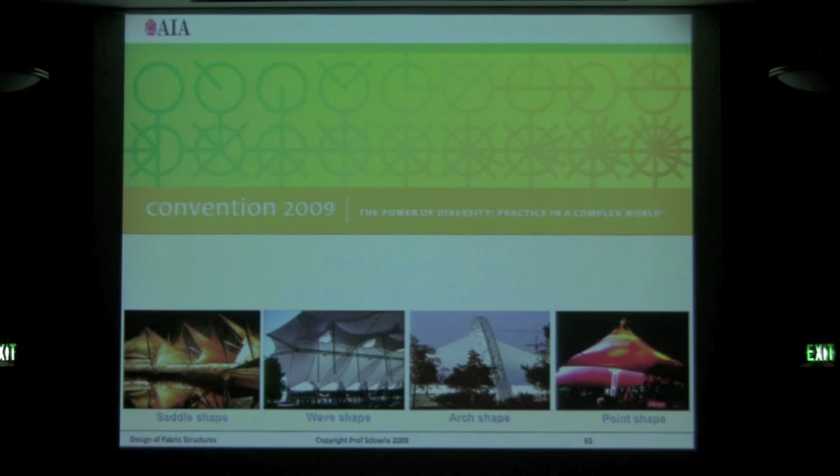There are basically four types: on the left, saddle shape, wave shape, arch shape, and also point-supported shape. But in each one, there are many different possibilities, as we will see in a moment.

There are also three different edge conditions, namely edge cables or edge arches, which would be in compression, edge cable in tension, or edge beams, which would be subject to bending. Depending on the condition, either one of them would be more appropriate.

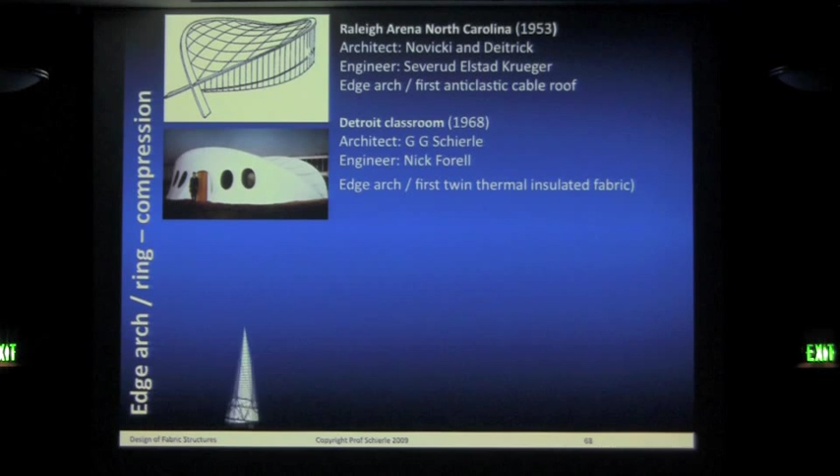And here are a few examples of edge arches or edge rings. They are, of course, subject to compression, which is not quite as efficient as tension, because there's also buckling involved.

And here are some of the first examples of saddle shapes, where, of course, again, different forms are possible. They could be square, hexagonal, triangle, or whatever.

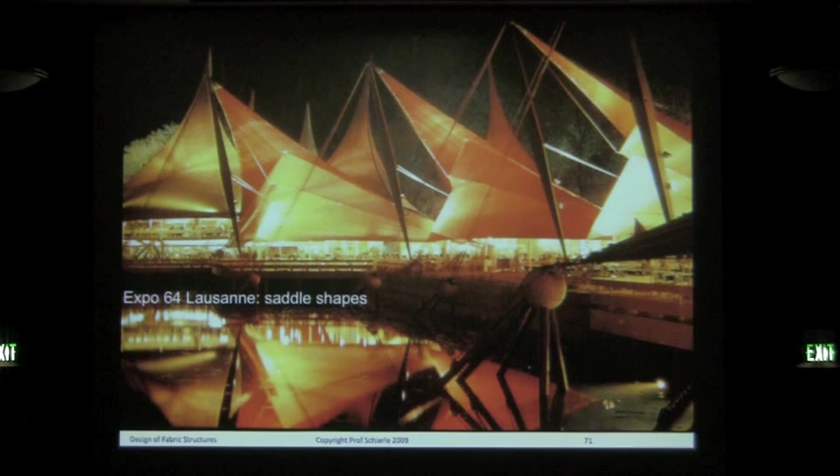And they can also be made either as a cable net or as a fabric, which is anticlastically curved. Here's the one which I got first involved in, in 1964 in Lausanne, Switzerland, which were basically saddle shapes, and they were kind of symbolized sailing in Switzerland, and it was kind of an experiment. We actually learned from our own mistakes how to change them, and then eventually put a cable net there to reinforce them. As you can see on the right side, it's a cable net, because we tried to first do it with only fabric, and it turned out to be not strong enough.

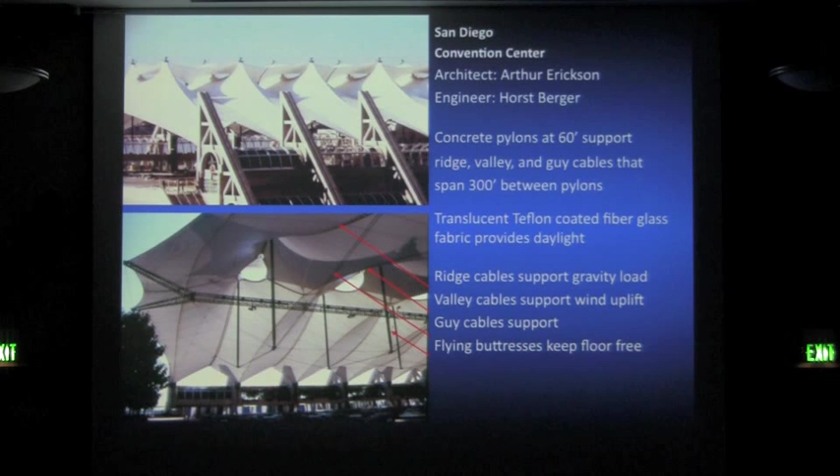The other one, very close by in San Diego, is an example of subtle wave shapes, actually supported by flying buttresses to prevent any mass coming down to the ground, which is a fascinating design to create a totally open space.

A very similar one, the Denver Airport, also designed by Horst Berger, an old friend of mine, is also a wave shape and a very good example. What is good about this structure is that it provides natural lighting, which we will see in the next image. Natural lighting to the inside is a very good, filtered kind of light. This is one of the greatest advantages of these kinds of structures.

These structures are also very good for a place like Los Angeles for earthquakes because they're very lightweight. They only weigh about 1 pound per square foot, so the seismic force would be very, very minimal.

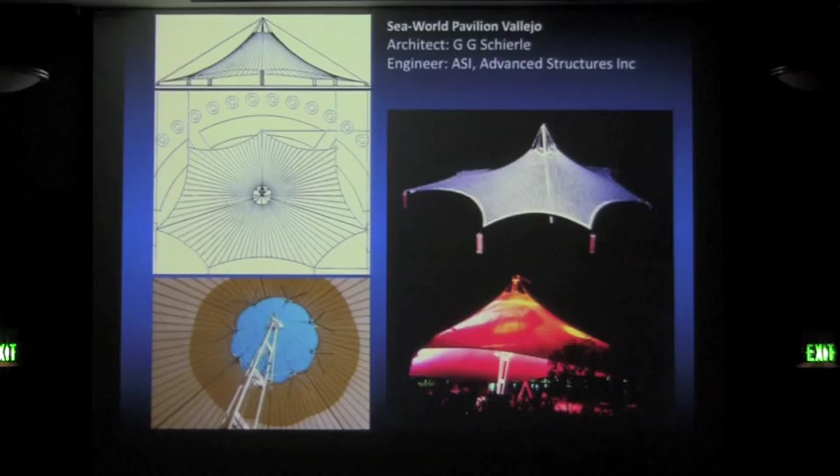Here's one of the very simple examples I did quite a few years ago in Northern California, which has an open top and actually a double fabric because the stress increases towards the top. So we use double fabric to make it strong enough. What's also interesting is it's actually one color, white, but done by projecting different light, so you can generate different colors.

I don't usually need a microphone, but I use one tonight. And now for something completely different, because I'm not an architect.

I've been teaching here for about 4 years, or they let me in for 4 years. They don't quite know what I'm doing. I'm an engineer by trade, or supposedly. I get paid for being an engineer, I get paid for teaching here. I teach environmental systems, and I help a couple of students with their MBS and PhD thesis. So I'm pleased to be here tonight. I've often been criticized about taking the mickey out of architects, and I'm not going to do it tonight. The question you have to ask architects is not why, but why not, when they want to come out and do things. I've been very lucky working with some pretty good architects along the way. I think they're just pretty good, you know.

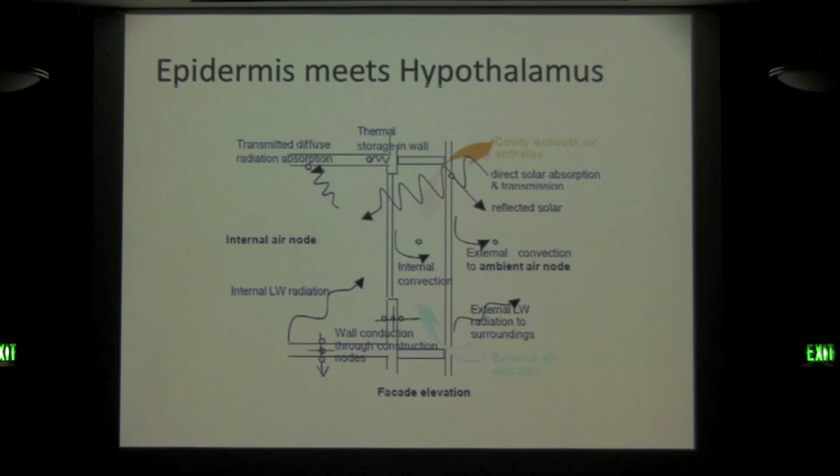This is the epidermis again, and how we're going to use this. We have a long association with Morphosis, with Thom Mayne. We've got Shanghai, we've got Giant Interactive. The middle one is Skidmore, Owings and Merrill in Saudi, and then we've got the Phare Tower. We've just won another competition in Shenzhen with Tom.

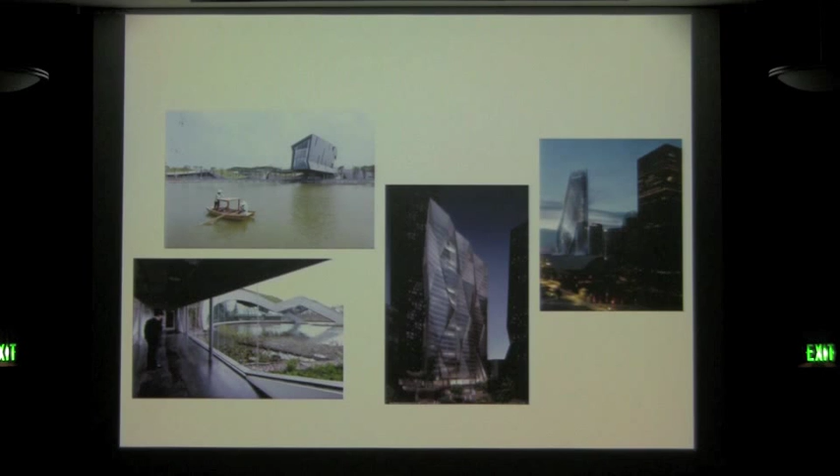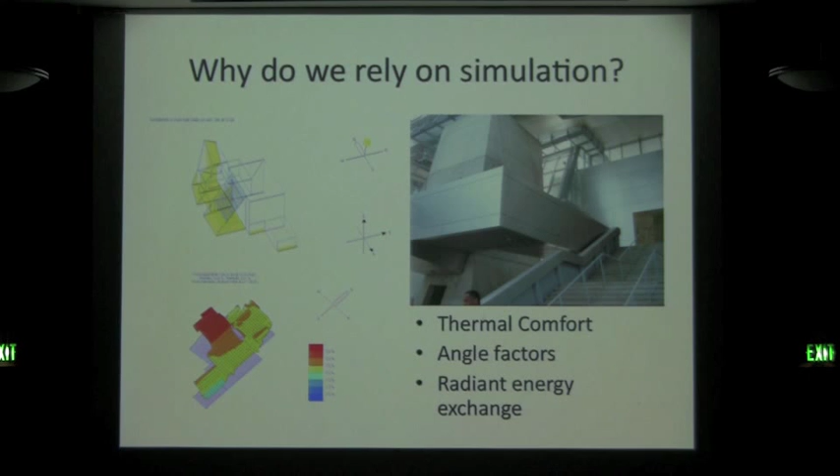Why do we simulate? Because it's very easy. What we'd love to do is actually construct the building, get it wrong, demolish it, and start again, but that gets rather expensive and tedious, so we have to rely on simulation. But how good is simulation? What are we actually doing? We're starting to get into real cyberspace now, comparing with Rhino and whatever's going on.

Unfortunately, some architects - this is Gehry - just because he's got CATIA, think they don't have to draw with a straight line. So when we start looking at some path diagrams from CATIA, it gets somewhat complicated, but inside the complicated mold we have these rectangles. How does it perform? We come back again to getting that whole building to work as one.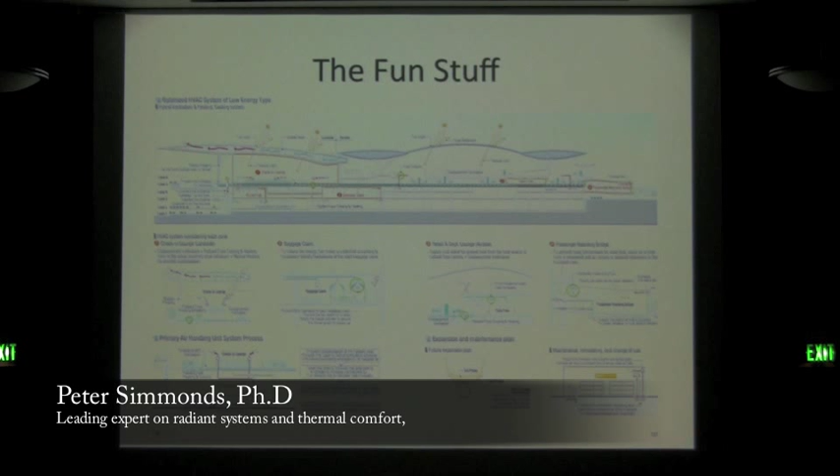There is some really great fun stuff - we won this competition, this is Incheon Airport, 6.8 million square feet. We've got a living roof, we've got air going through there for dynamics, we've got everything - radiant floors. You can imagine, this is kids' paradise - they could die in this thing. This is great, if only we get paid for it, it'd be fantastic. So the next thing is, when you build something like this, what about the energy?

What about the responsibility we're trying to do? So we're looking at CO2. One of the things we're trying to do is push down carbon neutral, AIA 2030, when we're going to get down here. So even with a building like this, we got it some way, about 65% lower than what a normal energy building would be for an airport at this time.

Look at other spaces we've got. Back to Gehry again - you've got so much being developed with CATIA, with Rhino and all the different stuff, which is fantastic. Previous speakers have shown some fantastic things. Will it work? How do you actually get it? How do you transform that spirit someone's got and bring it in there, rather than just say, well, we put two radiators against the wall and get a bit of sheet metal work.

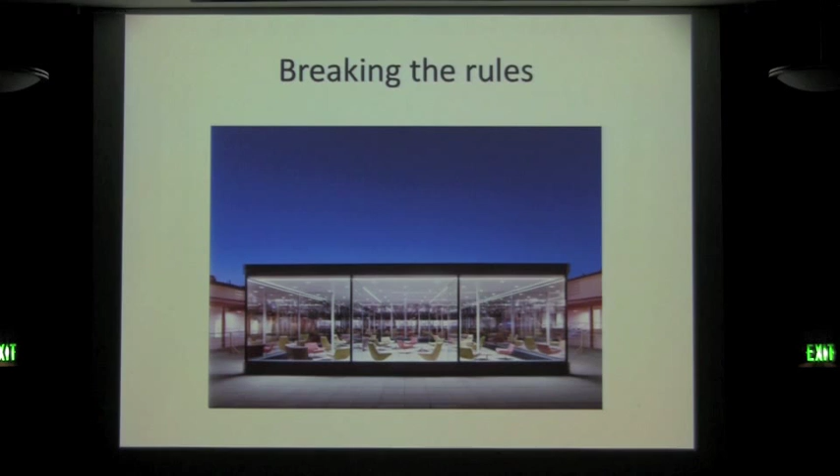This is Viñoly, in Claremont McKenna. This is brilliant - I actually got this as an engineer. If you look at it from structures, this is a glass box, literally. The structure is glass. It breaks every rule you can ever think of. Title 24 - it's got more than 40% glass. It's got no structure in there. Will it work? Of course it will. We haven't been sued yet.

One of the other courses I do here is 418, natural ventilation. I am sick and tired of architects, bless your heart, forgive me for saying this, with the blue arrows - the air goes in here, across the ceiling, out the other side, round the other side, and all this. I get these buildings, it's like, look at what you're doing.

There's a program called Vasari. Put it in Vasari. This is where we're coming to in the modern world, integrated design, when we start looking at natural ventilation - in Asia, in Malaysia, in China. Look at the photovoltaic, the whole integration, rainwater harvesting, and how you present this, how you orchestrate everything, basically what we've heard from the previous speakers tonight, all in one, and we bring it together.

This is the future - this has been around for a number of years. Artificial neural networks - you can actually get a computer to emulate the human brain. So how much time will it be before we actually have this carrying out actual thoughts for us and actually designing systems? It's actually quite frightening. I think Big Brother might take over and design the whole thing for us.

When we come down here, this is one of the last things we do, the 420 meters in Taiwan - Kids Paradise, turbines, everything else we got in there. But like I say, engineers are really good - they like numbers, but they're slightly more lively than accountants. Thanks very much.

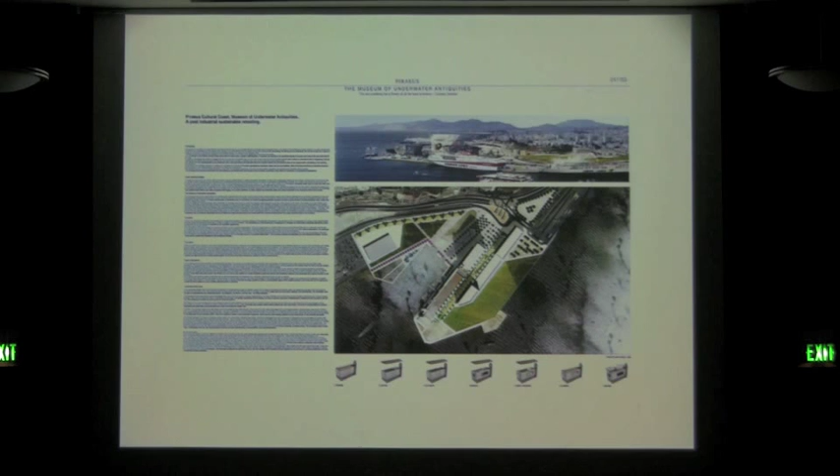When we came back, we said, well, since I'm creating my new practice, Studio Touraine, we've been cranking on these competitions in partnership with BL(o)T. I have to say all those projects wouldn't have been possible without the unlimited contributions of USC students.

So this one is a museum of underwater antiquities in Athens, in Piraeus. That's just a copy of the boards where the museum is coming on top of a silos building that we've been Gordon Matta-Clarking, cutting big holes in it and putting the museum on top. So there's this kind of rebirth experience where you enter from the ground level through the escalators that bring you to this lobby where there's an antique copy of a boat hanging there.

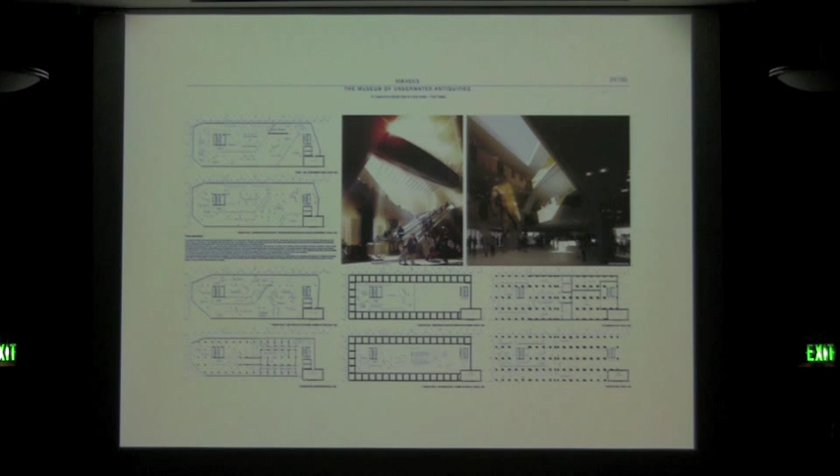There were a lot of things where we worked on grey water, having water dripping on green walls and treating that in a dry dock that was to the side of the building. We have the results in 2 or 3 weeks on these competitions. I don't know if we'll get any awards. We might be paid in olive oil, I don't know.

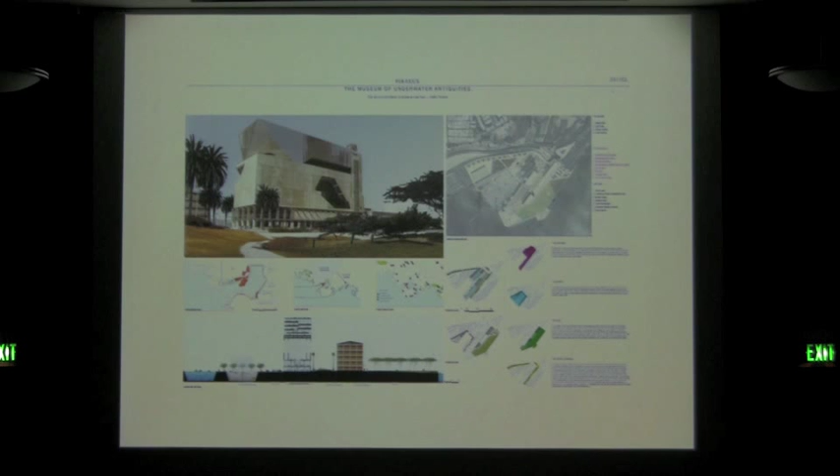I just wanted to show the sequencing this way. Those are the dry docks where we do the phyto treatments of the grey water. That appears to be an aviary as well, and a lot of recreational area all around this building. You can see how the existing concrete structure from the 50s is exposed and plays with graphics, with incredible events with sculptures of elephants, and the possible use of this upper entrance atrium during night and day. That's it for this one.

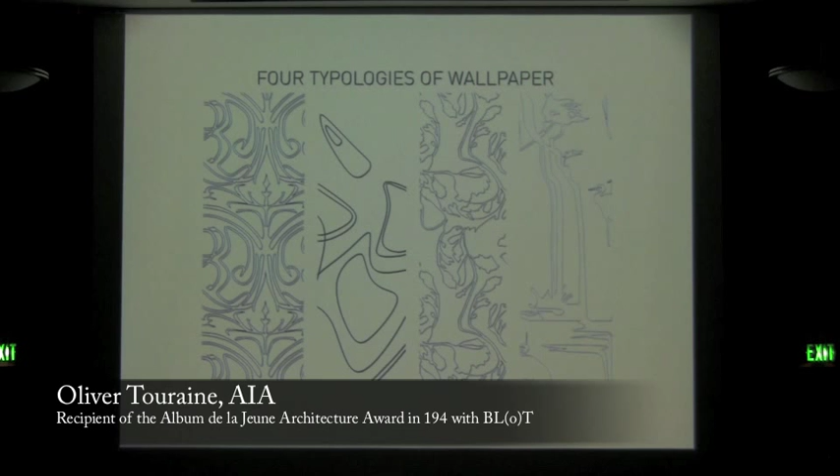In a moment of madness, I decided in August to work on a fashion line. I have a great chance to have a sister that is in the fashion industry. Actually, Monica is here - if you don't like the color, talk to Monica after. We've been working on 4 typologies of T-shirts that are under fabrication in an undisclosed location in China as we speak, undisclosed because I just don't know where it is.

Since I seem to really appreciate moussaka and olive oils, we did a second competition in Greece as well, this one in Crete - a school for European kids of civil servants based in Crete. This one is really kind of a plan. We've been lifting the existing topography, talking about olive oil - it's in olive tree fields. We've been lifting the existing topo and working with a very thin concrete slab which we're folding, and it becomes the receptacle of a grid of olive trees. So the topo is totally on pilotis, lifted and detached from the ground.

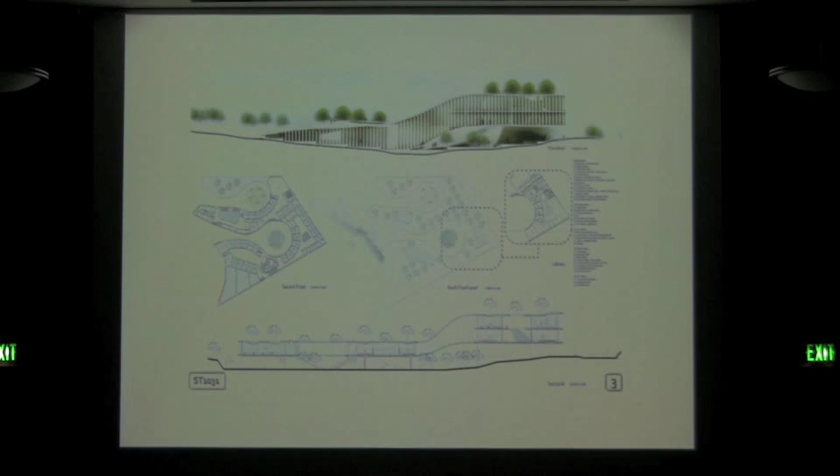We finished that like 10 days ago, and I swear not to do any more competitions until next year, which gives me just 2 months latitude.

That's one of the buildings we finished a few years ago. I thought that alphabetically I would be almost the last one, so that was a good way to close the door - that's a private residence in Minneapolis. Now it's up to Scott to wrap that up, right? Thank you.

Fabulous, guys. Okay, we are slightly off kilter here, I guess. But B plus U, my business partner and myself, have been practicing for probably about 10 years, I guess.

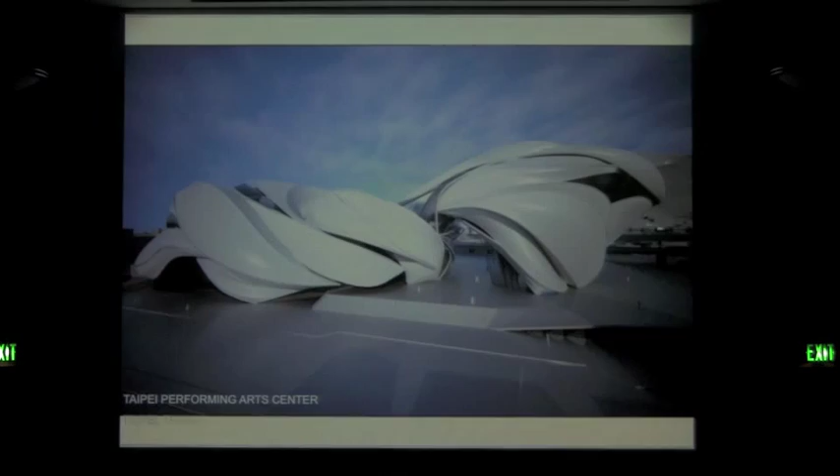This is sort of the accumulation of a lot of the ideas that we've been going through and developing along the way of our development of architecture. We went into this phase of going from the line to surface to volume for quite a while, in this sort of billowing architectural language of architectural character. It's typically based around very pseudo-pragmatic elements, so to a certain degree sedate on the inside of a lot of these things, but it was always wrapped in an exuberant sort of envelope, an exuberant skin itself, trying to relate to the environment, the site itself too.

Creating large halls in the middle of this. This is a bit of a crazy project, a Taipei Performing Arts Center, just like your typical performing arts center down the block is.

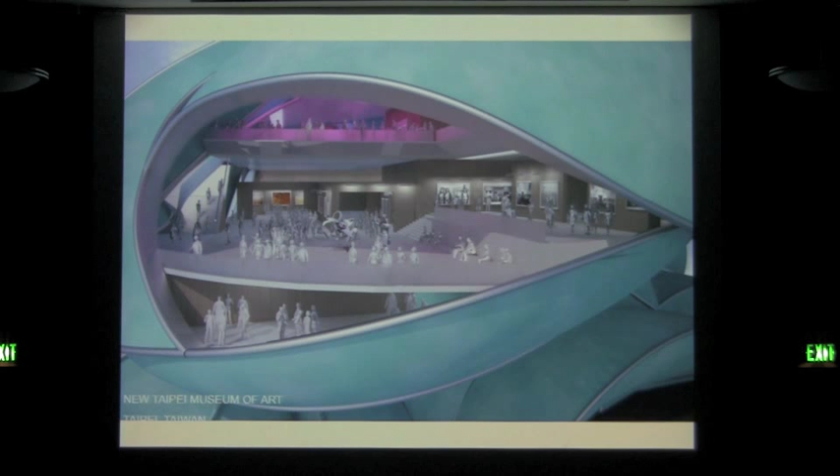A lot of the issues we had with this language was the idea of openings, and how to get creases and apertures into a project. A lot of this ended up being a problem with changing the entire language in order to get an opening in a building. It sounds like a pseudo-idiotic thing, and perhaps it is, but this was an issue with this sort of language that we had developed at this stage in our architectural career. So we started looking at, okay, what are other ways of developing a language for apertures and windows?

By the way, this lecture was titled 'How Not to Do a Window,' though that was blank at the bottom. But in any case, this is our version of a typical housing structure.

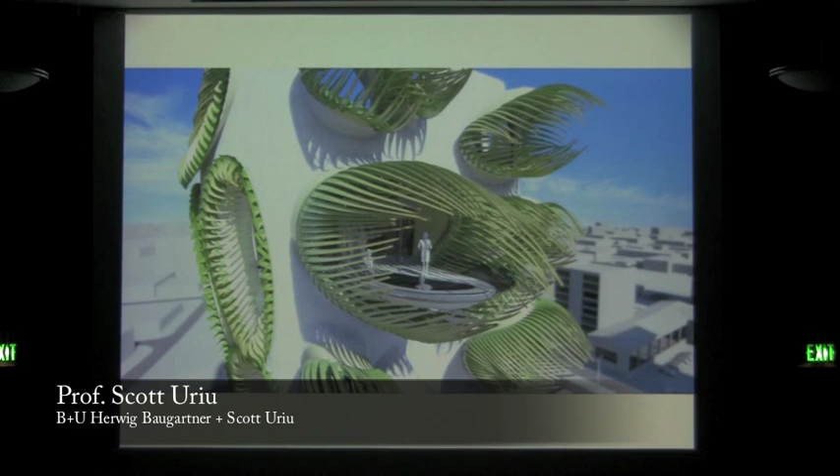This is a housing competition in Lima, Peru, that we unfortunately lost. On the inside, it's actually a very Le Corbusier-style interlocking unit. But we were really looking at the idea of aperture, extending the aperture a little like Lisa was doing, and blurring what exactly a window is. There's an extroverted version of these apertures that pulls out from the building, pseudo-enveloping the outside character of these balcony areas, and blurring the edge of the building itself.

So from street level, it's something different. From the urban level, the idea was that it also bends and moves with the air and weather patterns, like a swaying, crazy hula girl, working with the environment around it.

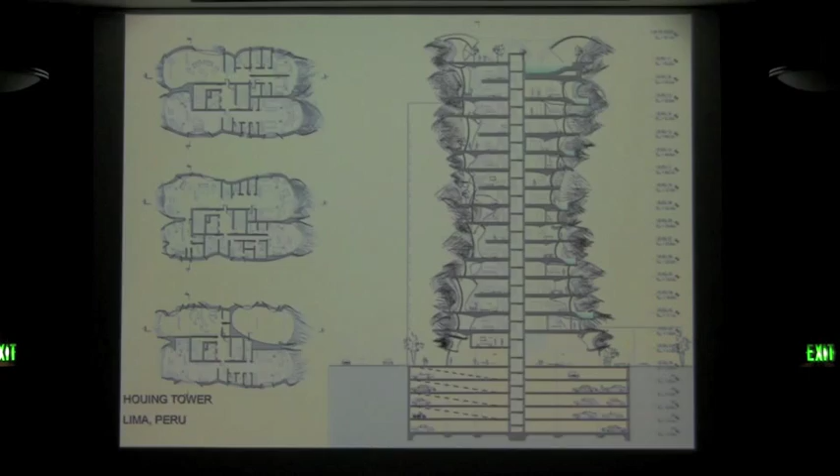Like Alvin, we're getting very used to losing competitions. This is another one we recently lost, although supposedly we made it into some second round, which I kind of don't believe some of the jurors who told me that. In any case, it's a harbor, Keelung Harbor, as Alvin explained—a luxury cruise liner harbor on the northern edge of Taiwan.

Again, we're looking at apertures mostly on this—developing space that not only frames what you're looking at but also controls and modulates the sun, the sky, etc., forming nice spaces to hang out while waiting for your boat. The outside has a grand park along a boardwalk that goes back into Keelung, and these are just giant apertures that form the terminal part.

This is a complex set of rules we had to deal with regarding security, and it was a very interesting program because it's much like an airport—developing how to interlock space while still maintaining security and spatial relationships, etc.